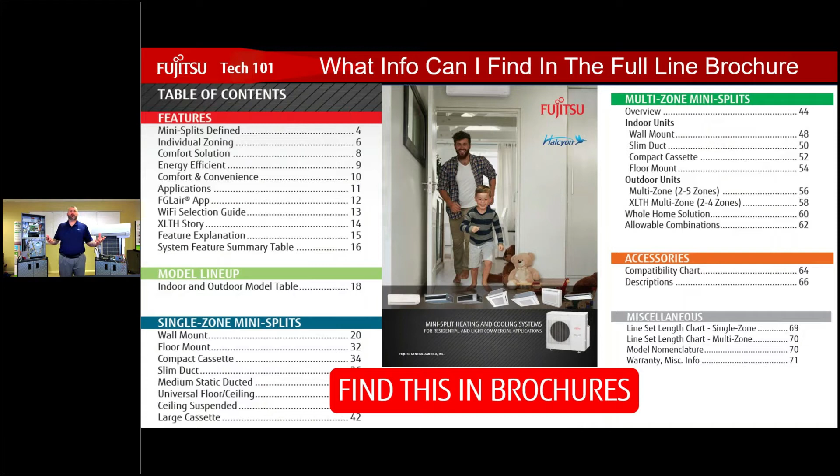Most of the stuff we're going to be talking about in this first portion is going to be found in your Fujitsu full line brochure. We don't have them in stock currently, we're still waiting for some, but you can go to the Fujitsu website. If you're looking to download it, you can download it, print it up, and staple it together. That's basically what we've been doing for the last couple of months.

This is what you're going to find when you open up your front cover. You're going to see our table of contents, features, model lineup, single zones, multi zones, accessories, and then miscellaneous information.

Understanding the Fujitsu brochure, one of the things that we have is our outdoor ambient heating design temperatures. We have basically tops in the industry as far as our heat performance is concerned. We have our good, better, best here, entry-level wall mount, that RL2 at the bottom in 9 and 12,000 BTUs.

That is a 115-volt system. We can provide heating down to 15 degrees and cooling down to 15 degrees. However, on the heating side, that's not going to shut off at 15 degrees, we're still going to be able to provide heat. The only thing is, as we get below 15 degrees, we start to lose some of the capacity of the unit.

Then moving up, we have our high SEER units, the RLF1 series, that's the 9 and the 12. Those are going to be both multi-zone and single zone capable, with heating down to 5 degrees. Once again, same thing, after 5 degrees, it gets rated down on the capacity.

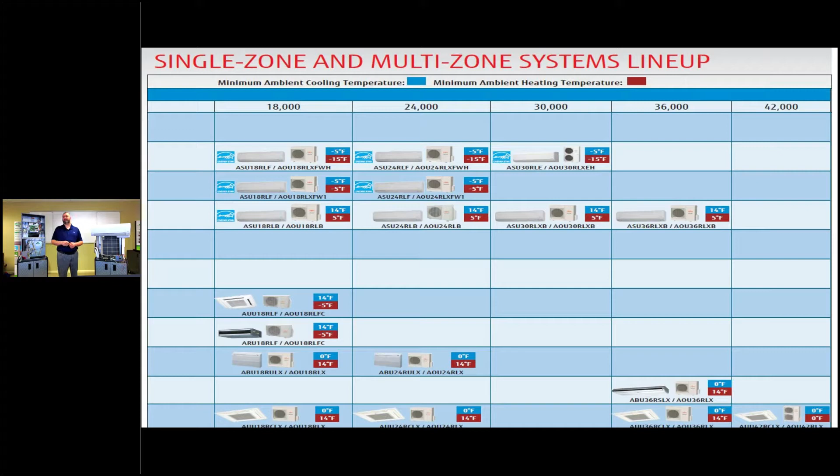New to the Fujitsu lineup, we have our multi-positional air handlers. These are something that I'm very excited about. It kind of brings the unitary to the Fujitsu world. We have these available in 2, 2.5, 3-ton, and 4-ton setups.

As of right now, they are 1-to-1, only single zone applications. We're hoping that we start to move towards, maybe adding the 2 and the 2.5 towards a multi-zone system at some point in time. But right now, they are going to be single zone systems.

As you can see here, we have our unitary products on the left-hand side. A direct comparison you can see with the multi-positional air handler, a much smaller footprint on the outside, with the unit still kind of being the same cabinet as we got used to on the Fujitsu unitary product. If you've seen the Rheem units, you've become familiar with that setup - that is the exact same cabinet as the Rheem units.

As I said before, capacities are 24, 30, 36, and 48,000 BTU. Multi-positional, we can have this unit blowing upwards, upflow. We can also do horizontal left, horizontal right, and downflow setup. The only thing is, if we're doing horizontal right or downflow, we'll have to flip the coil to make sure we can allow proper draining.

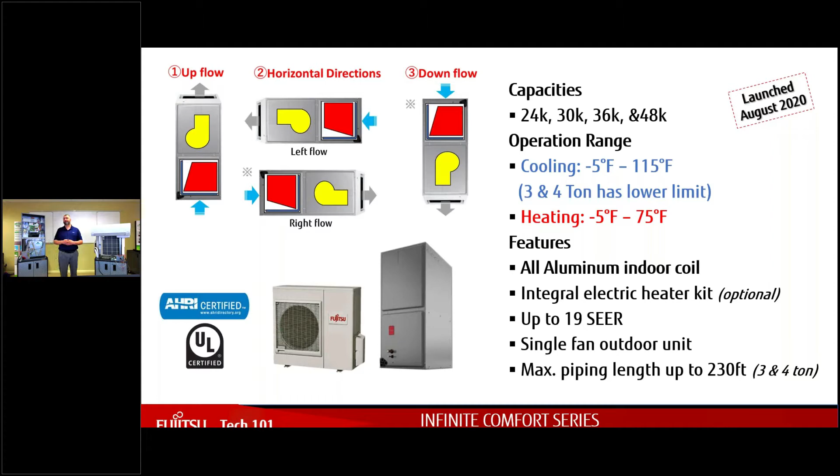Single fan outdoor unit, just like most of our Halcyon lineup. We also have the ability to do up to 230 feet of piping on the 3- and 4-ton system, so we can go a pretty long distance as far as piping is concerned. Now we're able to introduce mini split technology into a multi-positional air handler and start to get into that unitary equipment lineup.

A good question came in from Thomas. It has to do with efficiencies at the extreme end of the unit's performance. So if we're at -5 or -15, am I getting 100% out of this? Is it going to be diminished? I know there's more detail coming up.

On those extra low temperature heating units, we will be able to give you that nameplate temperature down to -15 degrees, and we start to lose capacity after that. Some of the other equipment is going to vary. We don't necessarily see 100% nameplate capacity when we get down to those design temperatures on some units, but it's going to be close, in that area. We'll dive further into that as we go forward.

One of the gentlemen wanted to know if we're going to have smaller wall-mounted units, smaller, like in the 3,000 range. There's nothing in the plans right now. We do have 4,000 BTU units on the VRF side, but on the Halcyon equipment side, nothing as of yet. We do get down to 7,000 BTUs, but that's only going to be in a multi-zone application.

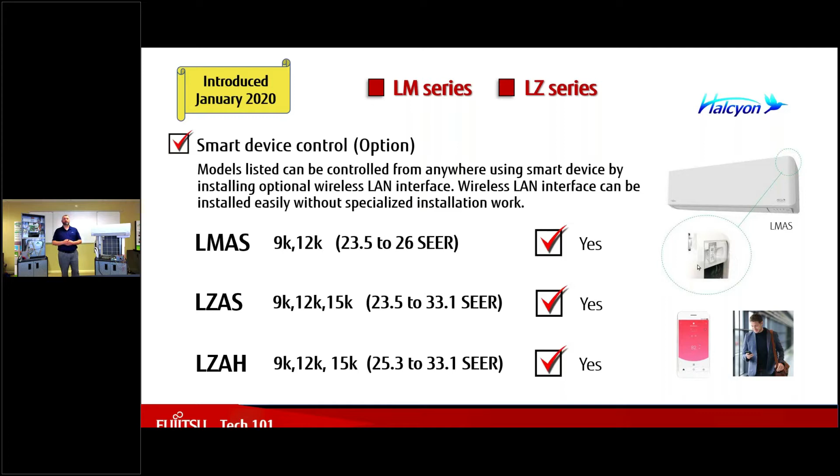We also have smart device control available with these three systems: the LM, the LZ, and the LZAH. All we have to do is install a little LAN interface box, which installs right in the upper right-hand side near the control board, and that gives us the ability to control our system from our smart device - iPhone, iPad, or whatever you may be using as a control.

It also has the ESP function. Basically, if you are in the room, it senses motion and operates normally. If you leave the room and there's no motion, it's going to power itself down, so it's not using so much energy to heat and cool an unoccupied environment. Once you walk back in again, it activates and goes back to its most recent setting.

Some remotes are available for a single zone system. All of our wall mount systems come with a handheld remote control. These are optional accessories that have to be purchased outside of that.

We can install wired remote controls, simple remote controls, communication kits, external connect kits, wireless devices, and such. So there's a bunch of different options we can go with as far as connectivity to our system.

One reason you might want to hook up a wired remote controller is that most of these wired remote controllers have a thermistor built into them. So if we have a unit installed high up on a ceiling, and our congregating area is 12 to 14 feet below, we can set the unit to read temperature from that remote controller instead of the thermistor 14 to 16 feet up in the air, making it a more comfortable living environment.

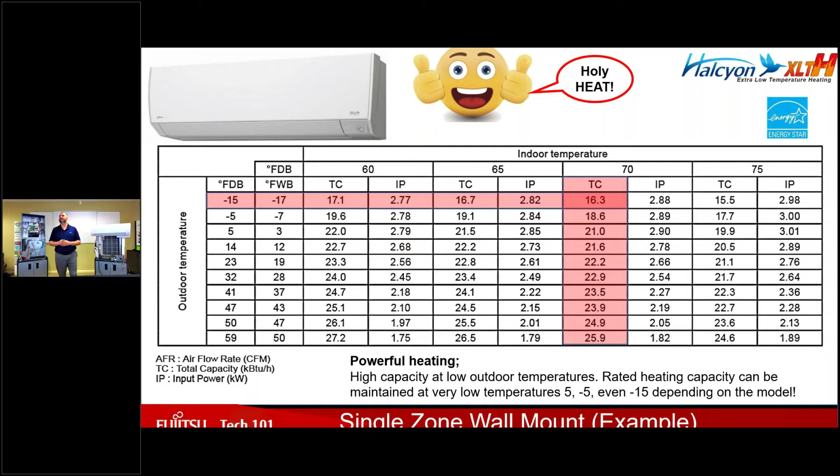On these systems, you get a more robust type of remote. You get a weekly timer, economy, even sleep mode. It comes with powerful operation, and you could do minimum heat. So say if you're going on vacation and you just want to set the unit so you don't freeze the pipes in your house, you have the ability to do so just by clicking minimum heat. Save yourself some energy, and save yourself the worry of dealing with busted water pipes and a flooded basement when you get home.

Moving on, the 9 and 12 RLFs. This is the middle of the line unit, also able to be hooked up to multi-zone systems. So if you see a multi-zone system, an RLF is going to be the indoor unit in the indoor unit model number. Mid-range on the efficiencies, 23 and 22 respectively.

And an HSPF of 11, which does put that in the Energy Star category. So for a single zone system, if you wanted to install one of these, you will have an Energy Star unit and possibly rebates to come along with it. Cooling down to 14 degrees and heating down to 5 degrees. Once again, none of our equipment will shut off at those lower temperatures, we just start to lose some of that capacity.

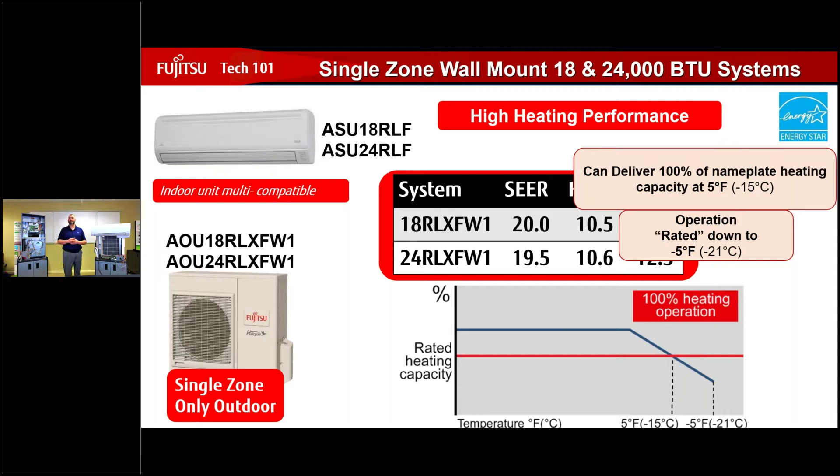So why would we want to provide cooling at -5 degrees? Exactly for that reason, this is why it's perfect for a server room. Server rooms always end up producing a lot more heat, therefore they need a lot more capacity all year round. In order to provide that, we need to be able to get down with our cooling operating range - so -5 degrees is what we're able to cool down to.

So another thing with these pieces of equipment, let's say you have a larger room that's going to be more than a 30,000 BTU capacity to cool that server room environment. We have the ability to daisy chain the wiring between the two units, and that will allow us to have lead lag control.

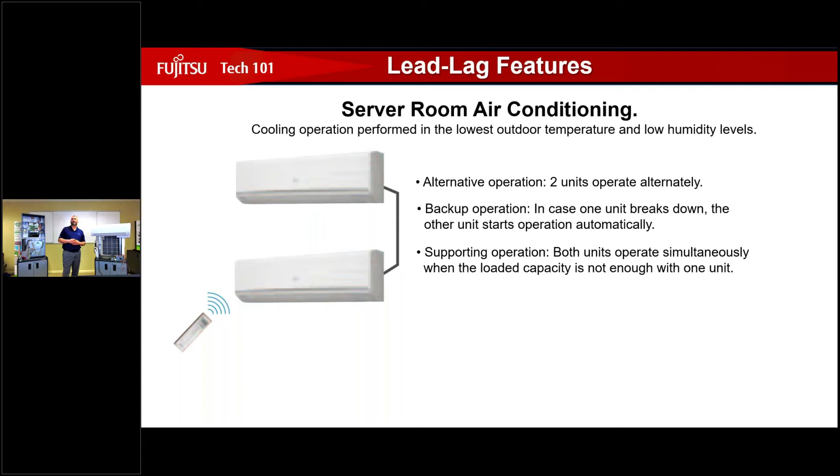Also, this is an optional accessory that comes with a wall mount remote. But if you wanted to, you can get one of these, the RNR UZ2. That's a control meant for this piece of equipment, and it can display the room temperature right on the control, so you have that ability. Just remember that wired remote will not work with a lead lag twin installation, so if you're looking to do a lead lag controlled system, we want to make sure we go with the handheld remote.

Then we get into our outdoor units here. You can see on the bottom we have our 18, 24, and 30, 36 configurations. The 30 and the 36 come standard with a blue fin heat exchanger, which is just an anti-corrosive coating put on the coil, a cobalt blue protection. That's really useful in shore type applications where we have a harsh environment. We could also have the outdoor boards coated so they're less susceptible to the harsh environments of shore living.

Heating capacities from 5 to 75 degrees, cooling from 14 to 115 degrees, and you can see the efficiencies as well, around 19 down to 16.5 on the SEER rating, and starting at 8.5 and going up to 12.5 on the EER. The 18 and the 24 are Energy Star units. The 30 and the 36 are not.

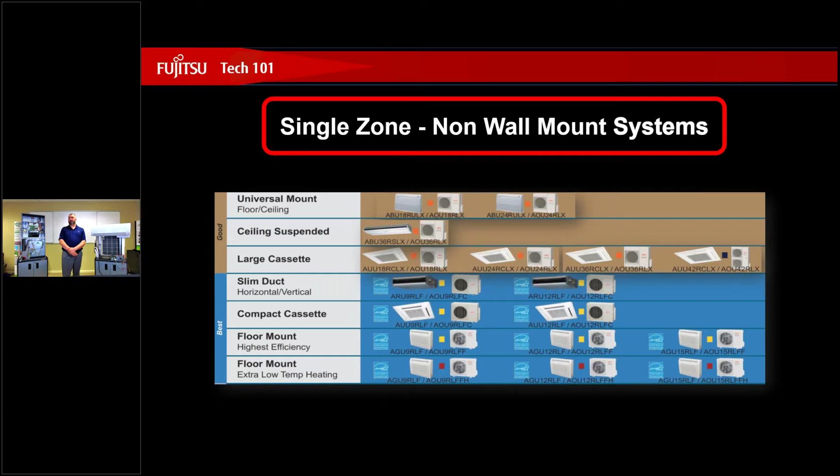Hey Rob, I got a question on this universal. Now that you clicked on it, what's a good application for this? The best kind of application, or most frequently used application for this piece of equipment, is going to be in a church or a school or something like that, usually found in the main areas, vestibules, foyers, stuff like that. Sometimes they'll take the place of PTACs, but most of the time you're going to see these in schools or churches. Thank you.

Let me go back. So you could see there, we have our ceiling mounted, floor mounted universal piece of equipment, 0 degrees low ambient out of the box. So we could also use these for server room applications if need be.

160 foot on the extended piping. So once again, for single zone system, very long line sets, and as I mentioned, great for schools and churches.

We get to the 36, that is only going to be a ceiling mount. We don't have the ability to mount that on the floor. 160 foot pipe and up to 98 feet of rise, so we can go upwards as much as 5 stories, or even downwards if we have to, if we wanted to install the outdoor unit on the roof and then put this indoor unit on the first floor. Once again, can be used in a computer room, and we also have a fresh air intake option, which I'll talk about a little bit more once we get into the accessories portion.

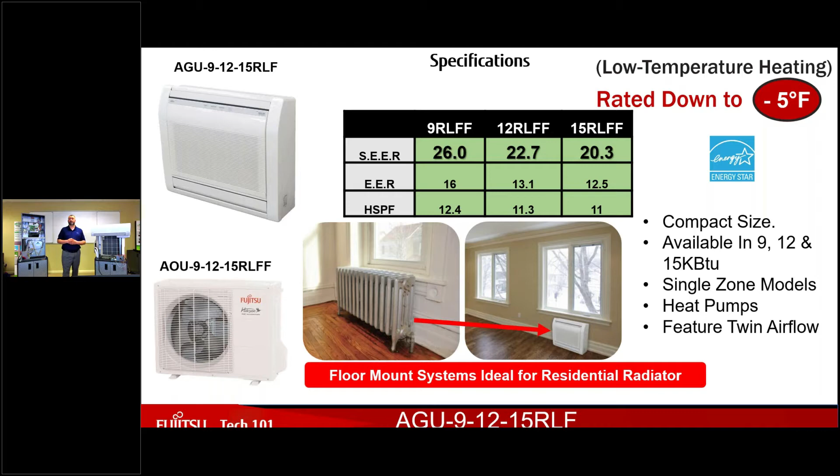But here's our answer for that. So available in 9, 12, and 15,000 BTUs. All of them are heat pumps, and they are available in extra low temperature heating. You can see that right there, down to negative 5 degrees.

Getting into the slim duct units. We have the ability with these guys to do a horizontal and an upflow scenario, available in 7, 9, and 12,000 BTU. We also have an 18, 24,000 BTU in a larger cabinet size. So we have 2 cabinet sizes that'll cover those 5 ranges.

These all come with a wired remote. We do have the ability to install a handheld remote, but we'll talk about that more in the accessories. All right, so these are our slim ducted units.

They do have adjustable static pressure. It's not automatic, so the static pressure is something that you're going to have to adjust on the job. And we always want to make sure that you know this is a very low static unit, so we cannot do a great deal of ducting with this piece of equipment. We want to keep the ducting very minimal, 5, 10 feet at the most, depending on what the sizes are. So something we want to be careful of when we're installing these. We don't want to do multiple rooms with these pieces of equipment. They're just not meant for that.

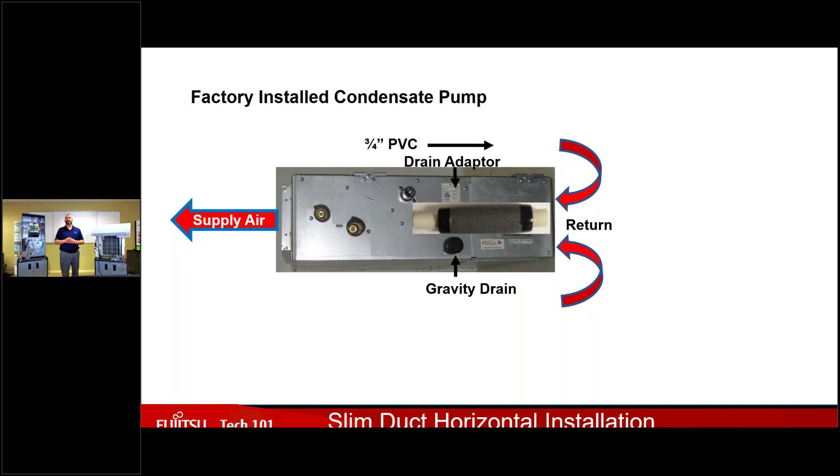All right, there's your lift on your pump: 33 inches from the bottom, or 28 inches from the port itself.

Now also, when we are doing this unit in a wall mount vertical application, we always want to make sure that we remove the JM1 resistor.

So if you look on the main control board, which is located right over here, on the bottom right-hand side of that control board, you'll see this little circle with the dots around it, and it'll have 3 resistors on it. They're labeled, but they're a little bit tough to see.

We want to cut the bottom one out, and basically what that does is it just cuts the power to the condensate pump. If we don't do that, we're going to get a condensate pump error code, because in that position, that condensate pump will actually send a closed signal to the board, telling the unit that the pump is working properly, but that there's too much water in the pan, and it's basically cutting it off. So we'll get an error code if we don't cut that JM1 plug out.

Excuse me, Rob. Yes, so another good question. Again, it looks like some people have never seen this unit before, or aren't familiar with what's a good application for it.

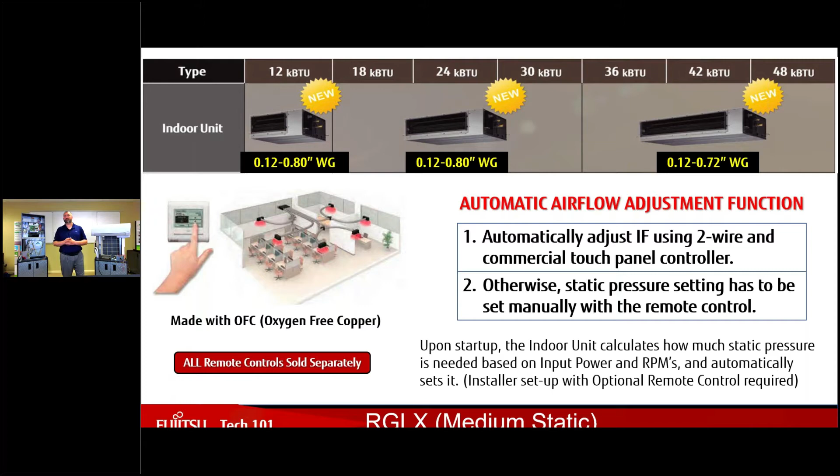If you use a 2-wire remote system on this, we get our automatic static pressure adjustment, so the unit will actually detect what the static pressure of the system is and adjust it accordingly. Otherwise, you would have to set that static pressure manually. So if you installed that 3-wire control, you'd have to do that manually.

Let's get into our compact cassettes. These fit in a 2x2 ceiling grid application, which is where we're going to see these used most, maybe in office settings, much like we have here, with a drop ceiling. Fits right in that 2x2 ceiling grid.

Maybe meeting rooms, stuff like that - that's where you're going to see these most of the time. They have a very low profile, a very powerful 2-stage fan, and they're available in 9, 12, and 18,000 BTU.

There is a factory installed condensate pump on these, and that is the same lift as the slim ducted system.

These units are shipped with a wired remote, but we do have the optional accessory to use a wireless remote control instead. And once again, that fresh air accessory kit - so if we want to introduce fresh air into the room as well, we have the ability to do so.

All right, getting into the larger cassettes. These are not going to fit into your standard tiles, so you might have to do some readjusting if you wanted to put these units in a drop ceiling type scenario.

One thing I do want to say - if you are installing them in a drop ceiling type scenario, we want to make sure that we always hang these units with threaded rod. We don't want to just suspend them from the ceiling, because they're going to be too heavy, and eventually, if not right away, they're going to fall and crash to the ground, and that's an expensive mistake.

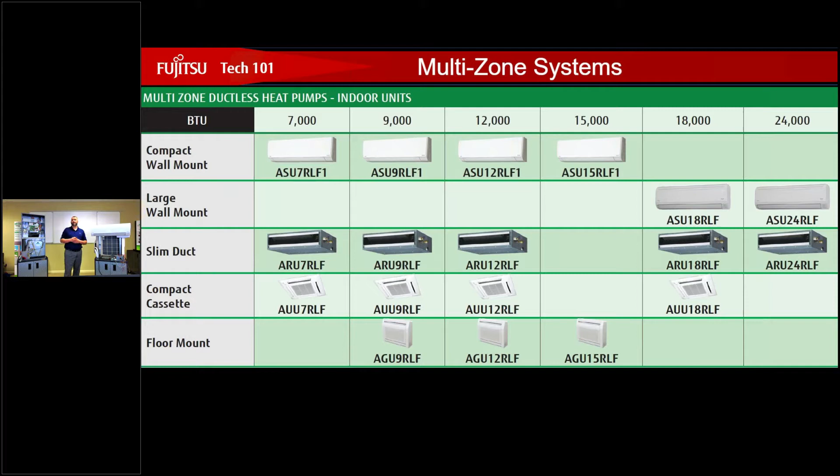The outdoor units start at 18,000 BTU. We can connect - or rather, we have to connect - 2 indoor units. With our multi-zone systems, it always has to be at least 2 indoor units.

Going up to the 24, we can do 2 to 3 indoor units. The 36, we can do 2 to 4. The 45, we can do 2 to 5.

The 48,000 has really been superseded at this point by the J series equipment, so I don't even think there are any of those left in existence, at least for sale. We might run into those as far as the service side of things, but as of right now, I don't believe there are any more available for sale. Just mentioning it because it's there.

These systems are able to provide cooling down to 14 degrees, heating all the way down to 5 degrees - that's our rated capacity. If we opt for the XLTH, we could do down to -15 degrees for these units. Not for the 45 though - the 45 does not have an XLTH.

Okay, so our connected capacities are always going to be the most important thing when sizing our equipment. We want to make sure that we stay between 80 to 130% connected capacity. The Fujitsu full line brochure goes over that, you can see your connected capacities. I believe it's on pages 63 and 64 of the full line brochure.

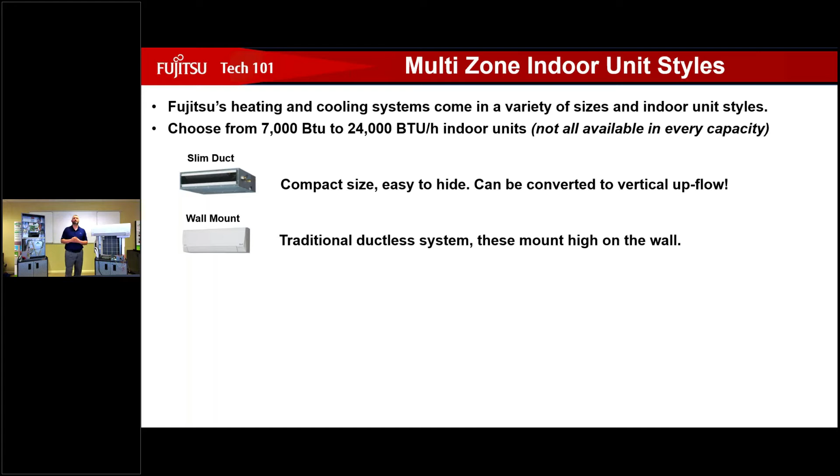So slim duct, compact, easy to hide, wall mounts, traditional systems - we've seen those all over the place. We have our cassettes, which we spoke about, they fit in a drop ceiling. Our floor mounted units for those who don't want to see it on the wall.

So getting to our outdoor units and the units that we can connect to them - as far as the indoors are concerned, everything in the Fujitsu manual is going to be color coded. So as you can see here, the 18,000 BTU system is going to have that yellow border around it. So anything in yellow, we are going to be able to hook up to this piece of equipment. We want to always stay within Fujitsu's guidelines.

24, same thing, now in blue. Moving to the quad zone, anything in red, and then moving to the 45, anything you can see in green.

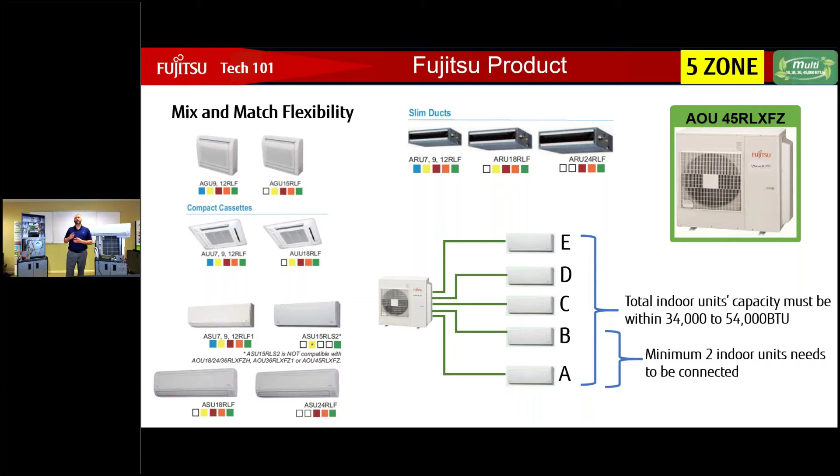So the gentleman asked, can I mix and match, or do all the units have to be the same? Yeah, so all of our systems have mix and match flexibility - that was actually the next thing I was going to get to. Which means if you want to put a wall mount unit in one room and a ceiling cassette in another room, and then have a ducted unit on the other side of the house, and a floor mount unit too - as long as we fall into the correct BTU range, we can mix and match our indoor units with impunity.

So where are we going to find that multi-zone information? Fujitsu full line brochure is going to be our best tool as far as compatibilities, combinations, BTU, SEER rating, HSPF, what size breaker we're going to need, what size wire we have to use, pre-charge lengths.

Total lengths for our copper lines, minimum, maximum, you name it, it's all going to be found in our Fujitsu full line brochure. So as you can see here, our 18, our 24, our 36, and our 45, we have specific ground rules that we have to go by strictly. These are all tested by Fujitsu to work.

On the 18,000 BTU unit, we can connect from 14,000 to 21,000 BTUs. So we could do 2 7s on this unit. We could do a 7 and a 12, even though it's 19,000. We could even do a 12 and a 9, because even though that reaches 21,000 BTUs, that modulation is really what Fujitsu kind of banks on.

We're not going to be operating at 100% capacity all the time. We may not ever really operate at 100% capacity except for on initial startup on a really hot day. So for the most part, they're very comfortable saying we can go a little bit over what that BTU rating on the outdoor unit is.

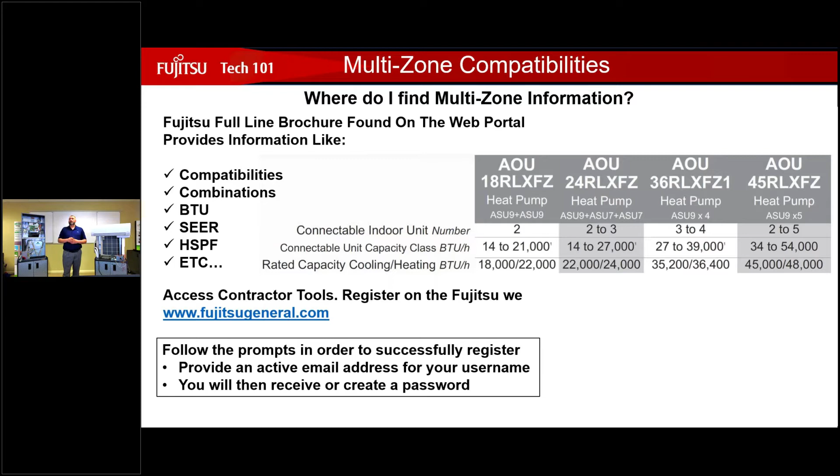Throughout Fujitsu's full line brochure, you're going to notice quite frequently different kinds of symbols, asterisks, numbers, other types of symbols. Usually when you see something like that, it means there's some sort of accessory kit you have to also purchase to make sure that you are compatible with this equipment.

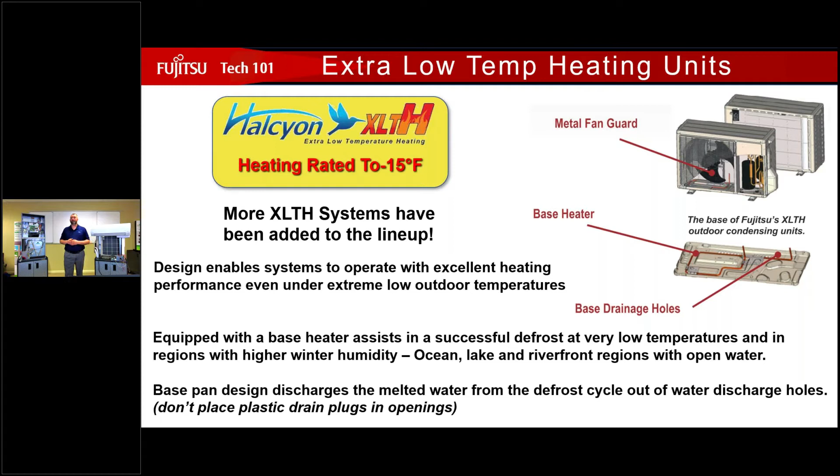So we have our single zone systems, 18, 24, and 30, and then our multi-zone systems as well, 2 to 4 indoor units, all available for XLTH, -15 heating capacity. Those are all Energy Star units as well. Here you can see the 18 and the 24, Energy Star, above 18 SEER, above 10 HSPF.

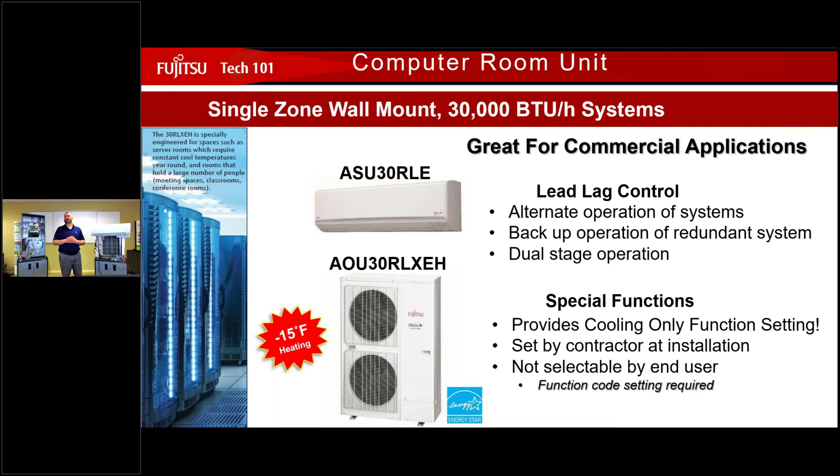Once again, our ASU 30 is great for commercial lead lag applications. 2 to 4 connected units on our 18, 24, and 36,000 BTU, down to -15 heating. Remember, the 45,000 BTU does not have that XLTH option.

Then we have our accessory remote controls. We have our standard remote control on the left, and our wired remote control with the multiple units feature on the right. Group control we can do on that one, up to 8 indoor units. Both are 2-wire setups, both very simple on the remotes.

The one on the right is going to feature a backlit display, so it's a little bit nicer to look at. Both provide basically the same kind of features.

Getting to our simple remote. You might see these simple remotes in hotel applications, something like that, where the building manager or building owner does not want the end user to be able to do too much with the equipment. It's basically going to give you start, stop, control the temperature, control the mode, maybe control the fan, and that's really about it.

Remote sensors, we can have those if we're looking to read multiple room temperatures, say in a ducted system or whatever, we can mount these on the wall. This is mostly for the slim ducted units, and it just replaces the room temperature sensor in the return. So basically we're no longer sensing from the unit, we're sensing from these remote sensors.

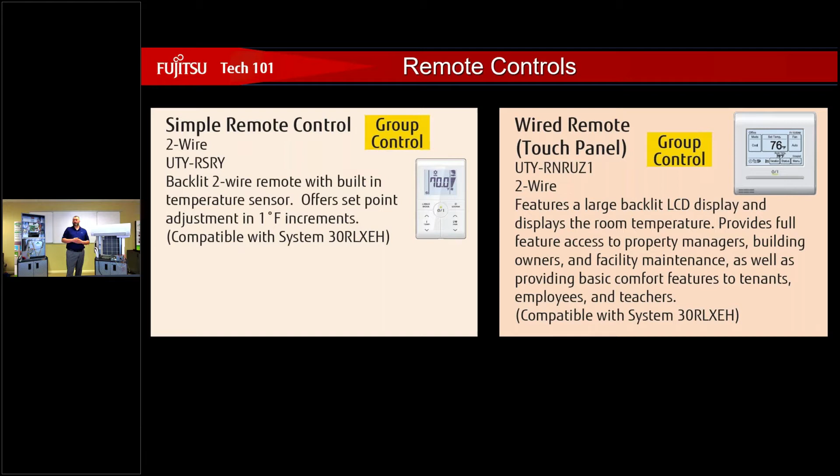Wireless remote control, standard, we have a couple of different designs for those. That's for spaces where we don't want to use a wired remote or more of a wall mount unit, something like that. Central controller, we can control up to 8 indoor units, set temperatures, timers, and all that right from the unit itself.

And then we have our receiver unit, which I mentioned earlier when talking about the slim duct and medium static ducted units. We can hook this little receiver up, about the size of a standard wall switch receptacle cover, mounted right on the wall. There's a wire that comes with it that plugs right into the board on certain pieces of equipment, mostly the slim ducted units and the medium static ducted units, and that allows us to operate those pieces of equipment with the handheld remote instead.

Always keep in mind, there's going to be a remote control that ships with most of our units. Make sure that fits what application we're going to be installing in. If it's something we might need to change, that's a part that's going to have to be ordered as an accessory.

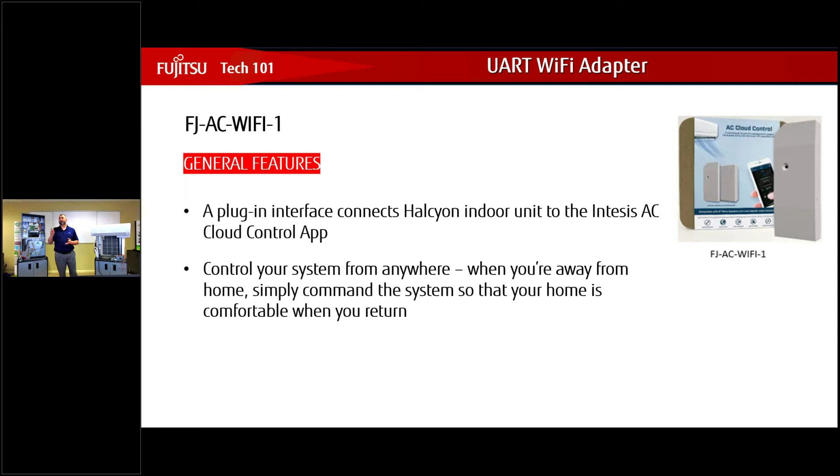Getting into the Wi-Fi, the FJAC Wi-Fi 1, this is an Intesis cloud control device. It basically plugs right into our board, uses a 12-volt power supply, 12 volts DC, power supplied through the interface cable that comes with it. That's going to allow you the ability to plug into the board and now control any number of our indoor units using the Intesis cloud control app. So if you're used to installing something like a Nest thermostat, this is basically going to be along the same lines. We now have the ability to control through an app.

Getting over to the building management side, we have our Modbus building management system. This is quick and easy installation, just like the other one, another very small part, roughly about 3 inches at most. Gives total control to the building management system, so you can control it through the Modbus building management system. You can adjust anything from dual heat, cooling set points, runtime counter, error indication, all that. Those displays will be sent to the building management system.

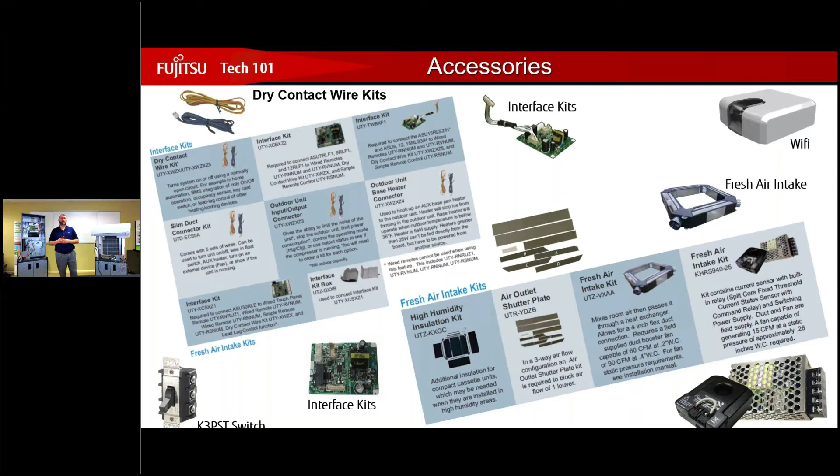If we're looking at the large cassette systems, we have the ability to shut down one or more of the air outlets on the unit itself. So if we're mounted close to a wall and don't need to throw heat or cooling at that wall, we could just put that shutter plate there. Also with those units, we have the ability to run one small outlet off of them as well.

All right, now brand new, something we've been asking for a long time, finally announced in November 2020: we have wind baffle kits. In a lot of trainings, guys would ask us if we had these, and we always had to say unfortunately no, you have to either make something or go with a third party. But finally Fujitsu has released them. There are a couple of different models - just go by which outdoor unit you have, and you can select the wind baffle you're looking to get.

Also available for J series as well. Basically, the use for these is what's called windmilling. If you have roughly 25 mile-per-hour winds pushing on the fan, blowing it in a backwards direction, you could end up causing a communication error on your system, which would have to be reset - a nuisance service call to have to go out and flip the switch to restart the equipment and reset the code. The wind baffles will prevent that from happening.

Thank you, Eric. All right, installation is very simple. You're basically using the screws that already exist on the unit - just popping them off and putting that wind baffle in and putting them back in. So very simple, easy application to install.

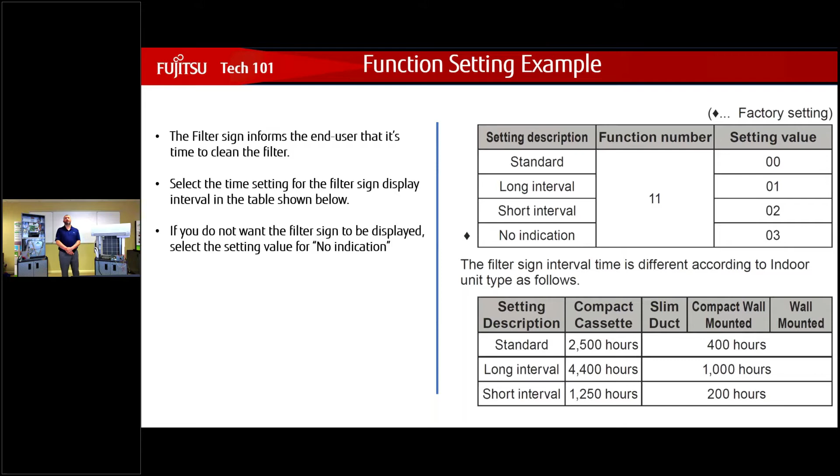And then you can see the breakdown: standard is 400 hours, long interval is 1,000, short interval is 200. I always went with once every 30 days, except if you're in a really dirty environment like a metal shop or a wood shop - those you might want to clean out weekly. It's not something I used too much when I was out in the field, but it's there as a reminder to the end user.

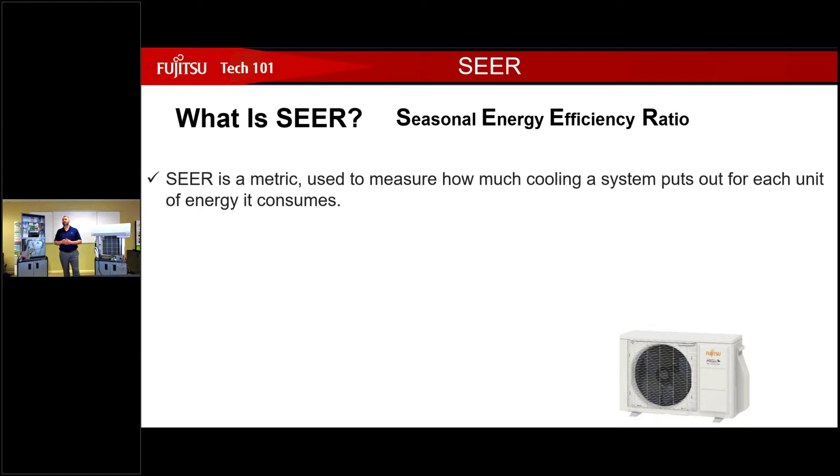Efficiency comparison. What is SEER? That's the seasonal energy efficiency ratio. It's basically a metric to figure out how much a cooling system puts out for each unit of energy that it consumes. The higher the SEER rating, obviously, the more efficient that unit's going to operate.

The LZS and LZAH are among the most efficient products in North America, especially on the heating side. There may be some competitors that beat us on the SEER, but they don't come close to us as far as the HSPF is concerned. So, 33-point SEER on those units.

HSPF, as I mentioned earlier, is heating seasonal performance factor, and that's basically showing the heating efficiency of heat pump systems. On our LZ series, we have an HSPF of 14.2. That's tops in the industry. Any heat pump manufactured after January 2015 is required to have at least an HSPF of 8.2, so anything produced after 2015 will have that. Remember, the higher the HSPF, the higher the efficiency of the unit.

So why Fujitsu mini splits? One of the main reasons, besides the convenience and zoning, is strategic electrification, something we're focusing on in America and worldwide. As you can see from the charts, about 25% of homes are electric in America right now, broken down by territory. In the Northeast, we are mostly in the natural gas range, but that's something we could start to get away from as well.

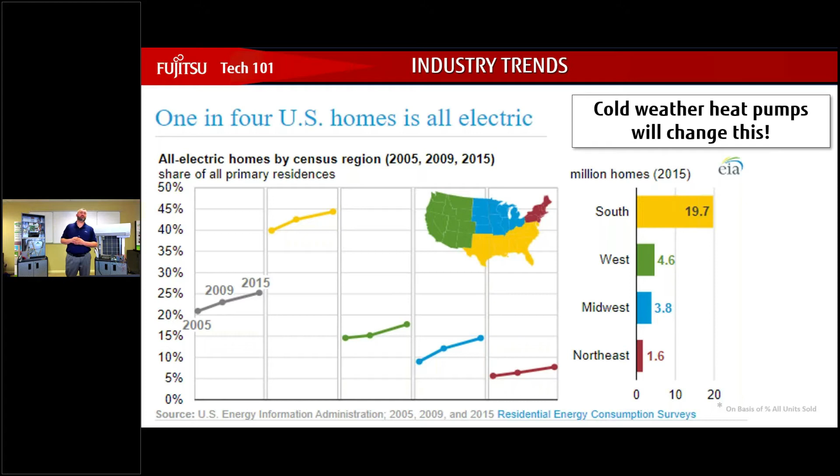Down south, you can see from this chart, right around 20 million homes are using electric as their source of heat with cold weather heat pump, and our heat pump technology is really going to start to impact those environments.

If you take a look at comparisons, in the USA between 7 and 8% of equipment purchased is mini split heat pump or VRF equipment. You look at the rest of the world, Japan is at 90%, China at 85%, and Europe at 85% mini split. So huge difference. We are always late to the parade on everything, it's just how we do things. We're very slow to adapt to changes worldwide, but this is something that's really going to start to take effect with this strategic electrification.

As far as 2018 was concerned, we saw a 16% rise in mini split sales and a 22% rise in VRF equipment. So you can see how we're changing very rapidly. Compare that to unitary equipment, which saw only a 7% rise. Growing exponentially.

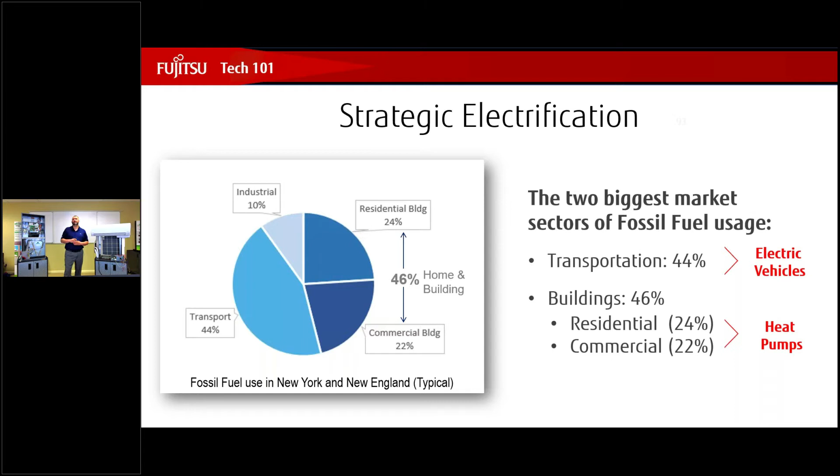Now, this is right here in New York, New England, not all of America. This is just our territory.

Because of this, they're being very aggressive as far as rebates are concerned. You can find a whole bunch of different rebates and tax credits, going to, in our territory, the NEEP website, as well as local and federal programs.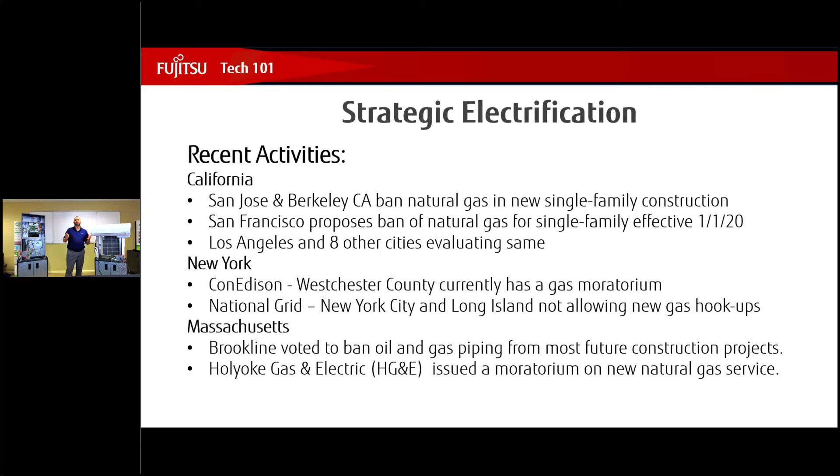Some recent activities in California, New York, and Massachusetts just show that we are moving in that direction. This is really the time to get into heat pump technology.

So why are we doing this? It's basically because there's a concern about our ever changing climate. We're getting warmer, and it's starting to get to the point where it's becoming a major concern, and something has to be done, not tomorrow, but right now. That's why there's such a big push for this at the moment.

So why are heat pumps part of that solution? The entire grid is getting cleaner. We are now producing a lot more solar energy and a lot more wind energy. That, coupled with the equipment we're installing with mini split technology being a lot more efficient, means we need to use less of the energy this is producing.

So Fujitsu products are basically the perfect fit for this scenario. What can we draw from this? Electrification means we need to install more. This is where we're going.

There is no better time to get started on this than right now, because the rocket's taking off. I follow stocks, and people, when they start to talk about a stock about to take off, compare it to a rocket. Same thing with this technology, same thing with these pieces of equipment. It's going to take off, and if you're late to that parade, you're going to be behind. So try to get yourself in as early as possible.

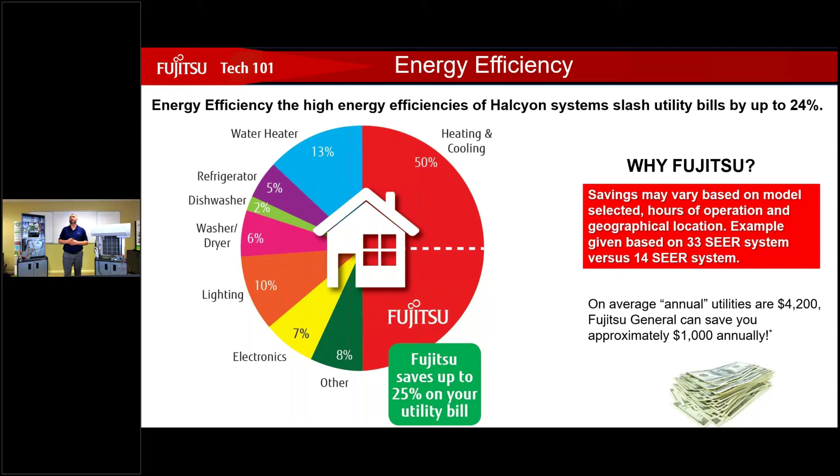So one of the things with our equipment, one of the main selling points - this is the exact pitch that I use on my own wife. As Jim would say, you want to make sure you could sell your wife, sell your grandma.

Me and my wife have discussions quite frequently on stuff around the house, and one of the things we talked about when she first got pregnant was the fact that we like to sleep in our room at 66 degrees in the summertime. We have ridiculous electric bills in the summertime, but that's neither here nor there. So this was my selling point to her.

We could still have our 66 degrees and still have our son, who's now a little more than almost a year and a half old, have his own climate in his own room. And that's what we're selling when we're selling zoning - we're selling individual climates to each home.

So we're at 66, we're comfortable, he's at 70, he's comfortable, her parents are staying in the spare bedroom - they may like it at 74 degrees. Old blood runs a little bit thinner, right Jim? Sorry, I don't mean to pick on you, Jimmy.

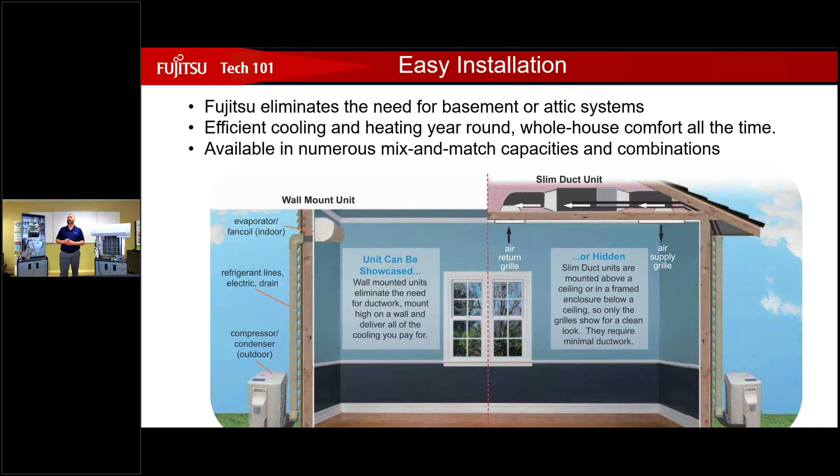At this point in time, we can do just about anything you can imagine, anything that you could ask for, from fast food restaurants to multifamily housing to office buildings to homes to single rooms, garages, car washes, you name it. We can handle all of those environments.

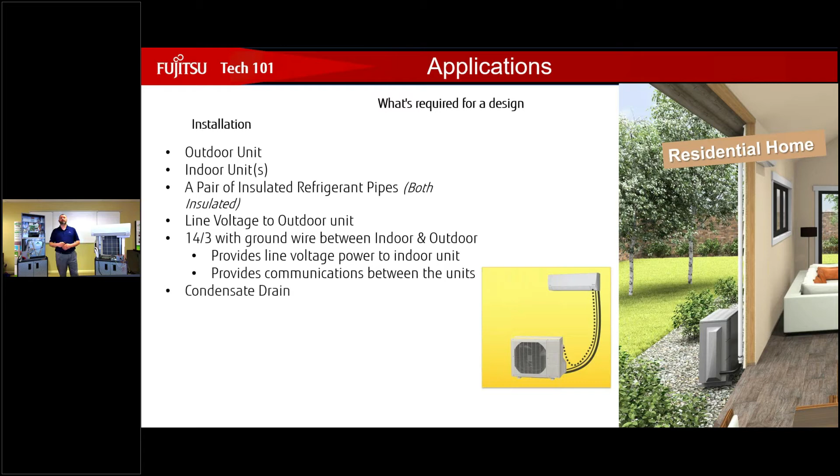Basically requirements for that design: pair of insulated pipes, line voltage to the outdoor unit, 14/3 communication, condensate drain, and that's it.

Our equipment can be controlled by the FGLair app. We can hook up with this little guy over here, the UTY TFSXZ2, and basically be able to control our indoor unit through an app.

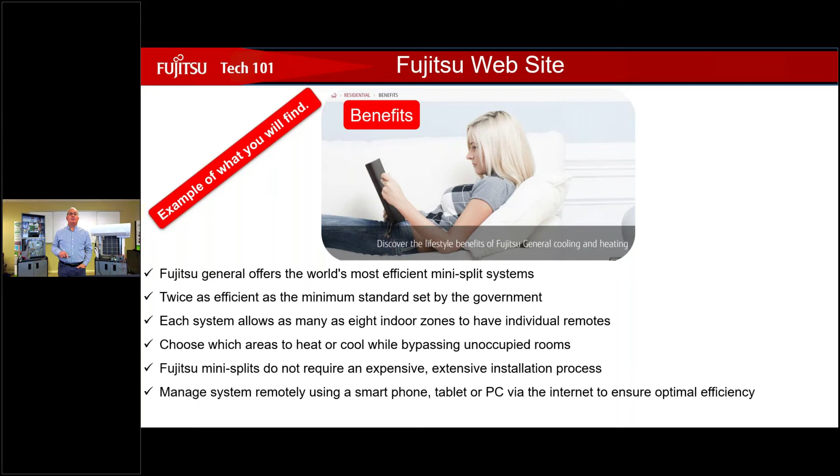If you can't tell, I'm really big on that. I really want you guys to take advantage of this. So if you click on the benefits tab, it goes through all the information you see popping up on the screen. These are the things you can talk about. Rob alluded to most of them on here, the efficiencies, all right?

You have to be able to explain to your customer why we're efficient, how do we operate. That's explained in the catalog, that's explained on the website, but everybody should be able to explain how a Fujitsu system operates, even if you're talking to my 95-year-old mom. So gentlemen, in a brief nutshell, how does a Fujitsu system operate?

It's going to monitor outdoor temperature, it's going to monitor indoor temperature, it's going to monitor the refrigerant temperature, and it's going to ramp up and down based on those different temperature settings.

If you want to really break it down, it's like cruise control in your car. I'm going to monitor outdoor, monitor indoor. If it gets warmer or colder outside, I put more energy into the home to keep that comfort level. If it's cooler outside, I put less energy to keep the home comfortable. That's basically it. So if I have a weather adapting system, and a system that also adapts to the indoor environment,

we put more and more people into the room, the indoor unit's going to sense that. The unit will pick up on that, tell the outdoor unit, I need more power, basically I need more effort, and the outdoor unit will respond. That's how Fujitsu systems work.

So these types of benefits are described here on the Fujitsu system website. Technology, this will break into - back up. Technology will break into what's available, what we have available to you. It'll go over what I just talked about.

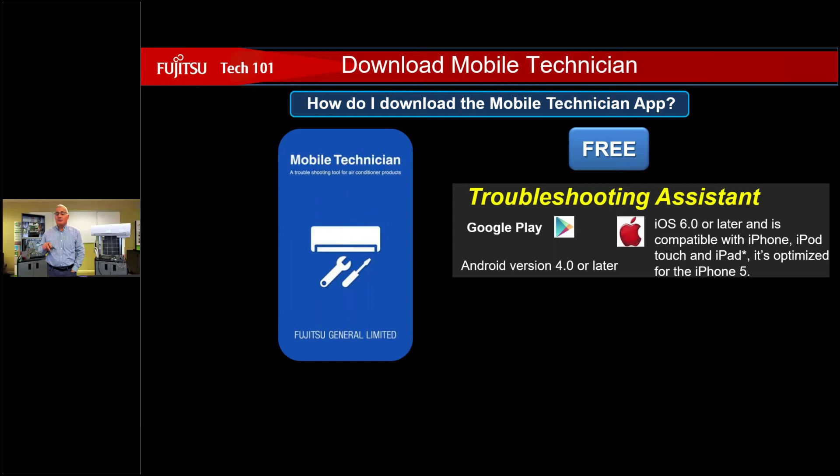So that is the Fujitsu Mobile Technician. You do want to take advantage of that. Again, it's a free download for Apple or Android. Download it today. That's the screen I showed you just a second ago.

We want to go to RAC/PAC. That's how you get to the Halcyon equipment. Obviously, I would go to VRF if I'm dealing with any of that equipment. On the utility, you can see where I can go for thermistors or the PT chart. Again, that's how you can find any of your thermistors. Any thermistors that are on our system will be on this mobile app.

I click on any one of them, and that's when I can go through the testing procedure, putting in the actual ambient air temperature I'm working in, and that would populate my resistor reading and my voltage reading. Sometimes we'll check our voltages going to the thermistor instead of ohming it out. So if the voltage isn't fine coming from the board to that thermistor, that would tell us it's a board problem. We'd have to change the board.

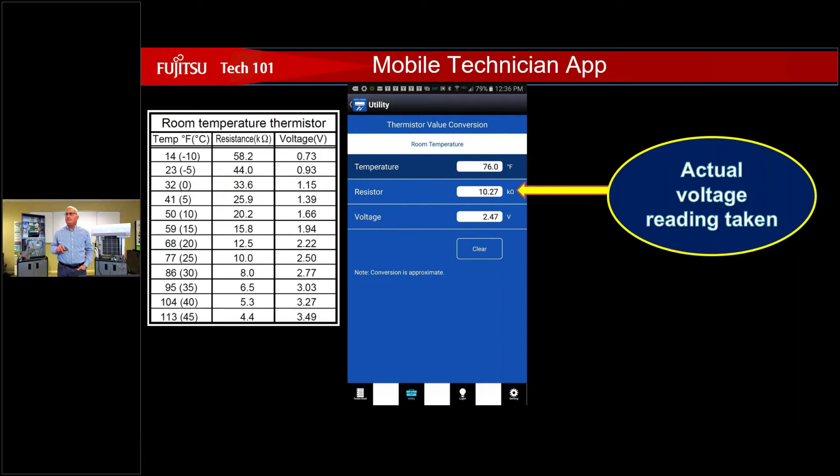All right, we click back here to get back to the home page, and we can go through any and all testing that we're doing. If I do get, let me show you this, because this is my favorite part of this.

So I'm going to go to RAC/PAC, and I'm going to pick an outdoor unit first. There's a search bar that comes up on top, and this is a global app, so you're going to see equipment on here that we don't sell in the States.

In my search bar, I'm going to put in AOU, and hit done. Now what's going to come up are all the different outdoor units available for us in the States. I'm going to pick a 24 RLXF WH, extended heating range. And then for my indoor type, I'm going to pick a wall mount.

I apologize if this looks a little wonky, we're doing our best. So I'm picking a wall mount, and I'm clicking done. Now it's showing me, if I have a wired remote, I could click on that to see the error code, or I can go to my indoor unit LED. Those are the three flashing lights on all of our indoor wall units. So I'm going to click on that, and here's what you're going to see.

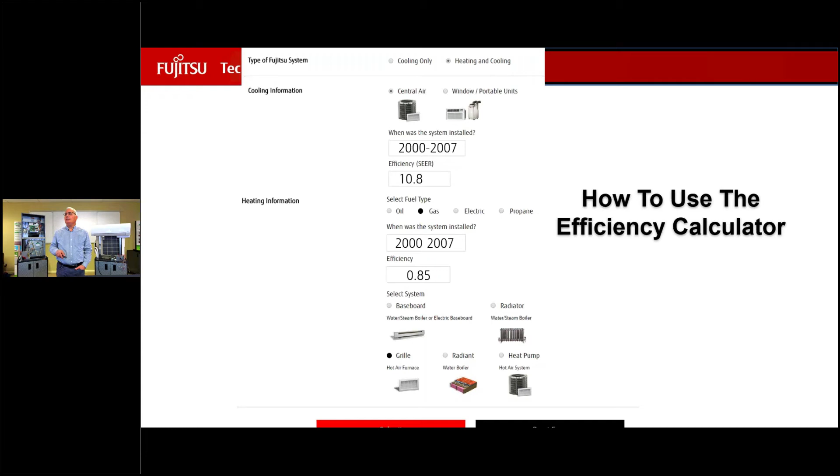Again, install the basic efficiency as you can - what am I replacing, how are we delivering heating and cooling to that system. All right, we click submit.

Then we put in where they live - so here, right in my territory, it's going to be Jersey, Paterson, and the size of the residence, as you can see, and it should populate with their costs. This is very intuitive - it knows the costs in different areas of the country. If anything here has to be changed, if their bills are slightly different, here's where you can make those changes. So it's not based on averages across the country, it's based on what Mr. and Mrs. Smith are using in that home.

So if everything lines up here correctly and the numbers are good, you hit continue. Then it tells them at the top what the results are - their average operating cost, as you can see here, is about $12.50 for cooling and $32.60 for heating.

And then in this area here, it would populate some Fujitsu equipment. It's not showing you in this example, but it would pick some equipment there. It also basically gives the potential savings. And that savings, every time I've used this with contractors, and I just did it

on my own home, it's at least 15 to 20% savings. That's a very powerful sales tool, gentlemen, because you're using Mr. and Mrs. Smith's cost of operation at their home. What does it actually cost? Here are their numbers, plug it in, and here's the potential savings.

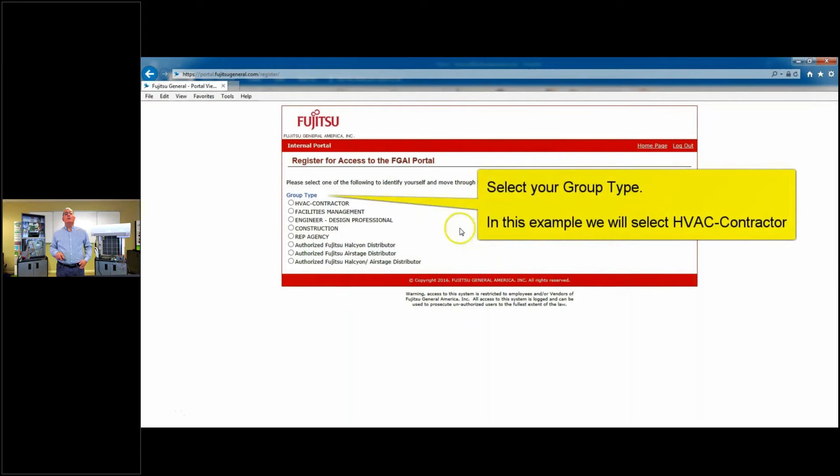You want to select what you are, what's your group type. You're going to click on the link, sign up for the toolbox. Again, you're going to put in your email address, you need to confirm your email address. Anything that's required, you need to fill out.

Put in your zip code, as you can see here, click on the agreement. Now your company may pop up, but if not, you can create a new listing - create your company, hit submit. Put in the information - you're going to need your company name, obviously, and your company phone number.

A little bit of a slow typer here. Rob, are you typing? Is it a 2-finger type? Is that what you're doing? Nope, not me. Work with me, Rob. This is kind of like pretty dull stuff they're looking at right now, just trying to make it entertaining. All right, you got to dance for it. No, no dancing - you don't want to see this old man dance, right?

Put in your address, put in your zip code, very important, and where you are, okay. Put in the type of business - you've already selected it, so that should be already clicked, but if not, click on it.

So if you do residential and commercial, you can obviously do both. Click on that.

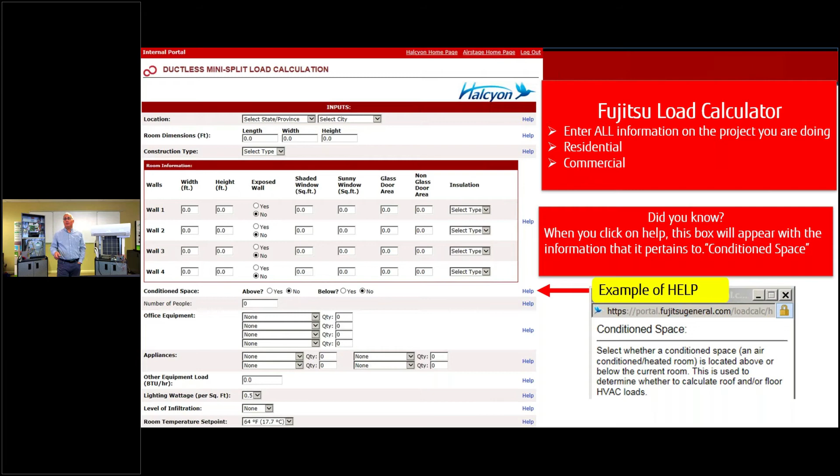You can leave your construction type as residential, then go in and change the different walls and what's on them. Remember, if we're doing a heat gain, I need to identify if a wall is north, south, east, or west—same with the glass. If I'm doing a heat loss, it really doesn't matter. I just want to put in my outside walls, because at night is when it's coldest and we don't have to worry about the sun. So you do that on a room by room basis to get those loads.

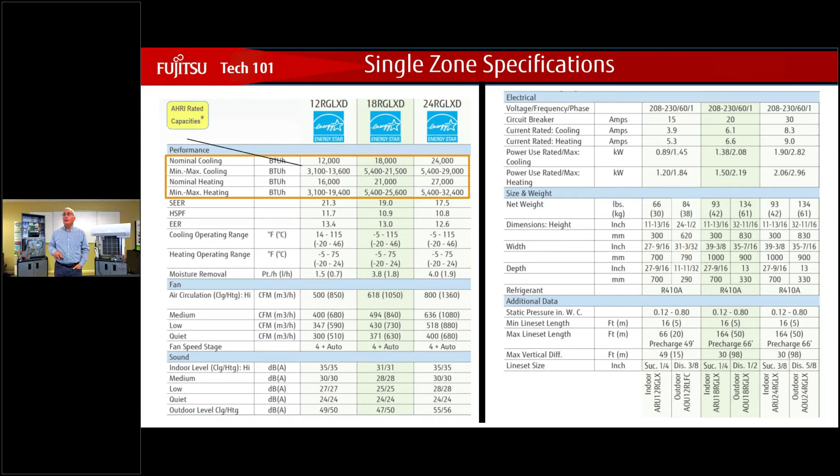Again, those are ratings up there, just where the equipment plays. That's not to use for sizing, okay? This is the design operation range, as you can see, just showing you where it can play. So if this is a -5 unit, you know you can play down there. If you needed something at -15, then you have to go to an H series unit, okay?

This is gold information here, because this is telling you what the line set length is, the minimum line set length that you need when you install our equipment. Whether it's single zone or multi-zone system, there's always a minimum amount of line set that must be installed. It's called out right on the catalog page, your line set size, and we're telling you what it was pre-charged to. So if you fall within the pre-charge length of line set, you never have to touch the charge. And if it's telling you need a minimum of 16 feet, that is the absolute minimum. You'll never hear from us that, oh, I'm only at 10 feet, take out X amount of charge. Never, ever. Not in the world of Fujitsu. That minimum must be installed. This way everybody knows your line set size.

The only thing we're not telling you right here on this page is the ounces per foot you need to weigh into the system if you're going past the pre-charge length. And we'll show you the maximum length so you never overshoot that. All right, these are hard numbers, and you can see they're kind of odd numbers because we're converting metric to feet. So if it says 66 feet max, that doesn't mean you can go to 70. That's a hard number. If it's 16 feet minimum, that doesn't mean 10 feet will be okay. No, it's 16 feet.

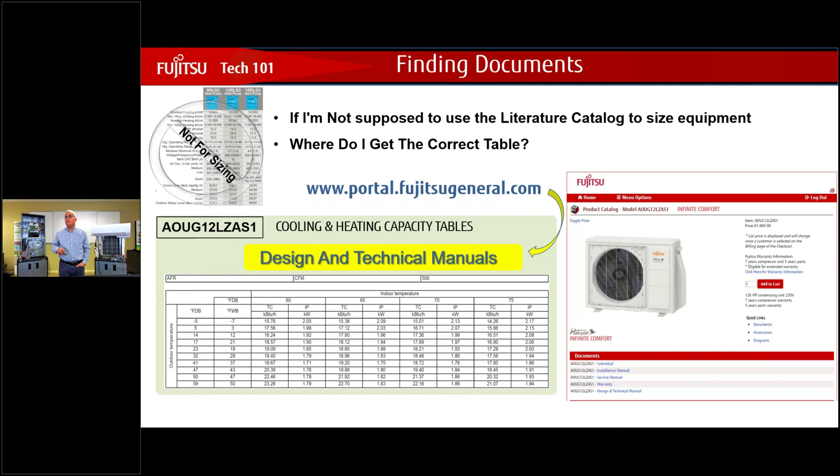So if I go to order entry product catalog, that's how I can find my equipment. There's your McDonald's page, as I like to call it - there's the pictures. Pick your equipment, or go to the search bar for system, or type in a part number, maybe you're looking for a different remote. You can find your unit, and there I can find design tech manual, service manual, install manual, even a submittal sheet if I need to put that as part of my sales package. Any questions on all of that, gentlemen?

Rob's shaking his head. He's shaking his head in multiple directions, so that scares me.

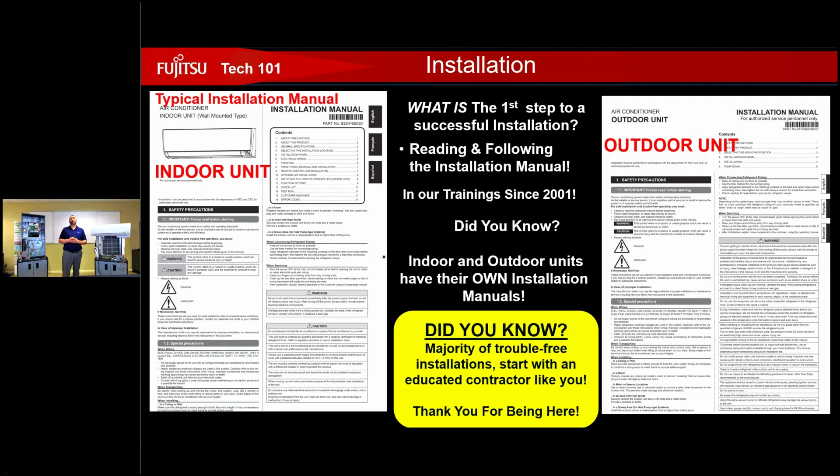So basically, you are going to have the same thing, a table of contents to start off. You can use this for a quick reference throughout the installation process if need be, but we always recommend that you read through the entire manual before doing an install. You can see there's a table of contents specific to the indoor unit and then specific to the outdoor unit. So starting with our wall-mounted units.

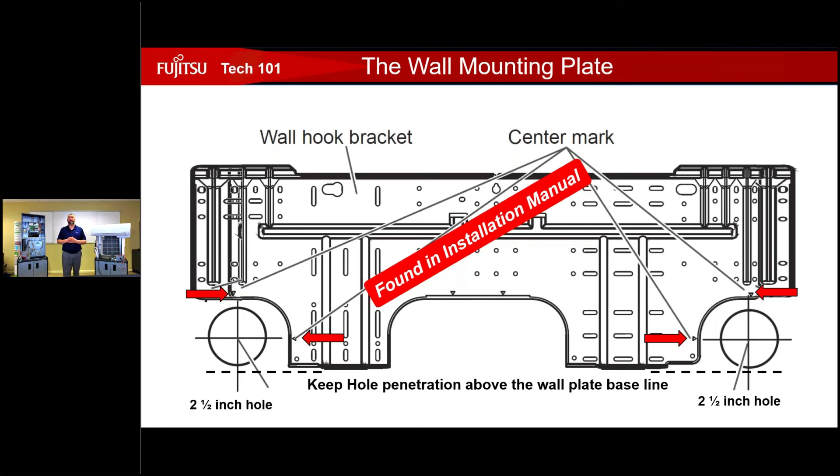2.5 inches is all we need. I have squeezed a 2 3/4, but if you try to squeeze a 3-inch bit in there, you're going to end up leaving a hole that the unit is not going to cover. So make sure that you're keeping within those parameters. Really, that 2.5 is all you're going to need.

So here you go. You have your right-hand exit. You have your 2.5-inch hole. Make the center of your hole where those two lines intersect. One of the things that I would do when I was on the job is I would put the hole on the outside wall about 1/4 inch lower than the hole on the inside of the wall, just to aid in draining. It's not something that was necessary, just something that I did personally. Made me feel a little bit better about the draining situation.

So the back of the unit, we have 6 ways that we can run this copper out. We spoke about 2 of them already, out of the rear outlets, left and right rear. We also have a bottom outlet on each side and a left and right outlet. To access those, there are little plastic punch outs on the side of the unit that we could pop off and run the copper in those directions if need be.

Getting to the outside, when we are putting the unit on the wall, this is that application we were speaking of before with the right-hand exit. When we're coming out of the unit, we want to push the copper straight out and connect the wire before we do any of this. I used to connect the wire before I actually lifted the unit up on the wall, just so that portion was done. I would also take the copper lines and the drain line and tape them together so they flow nice and easy through the hole in the wall.

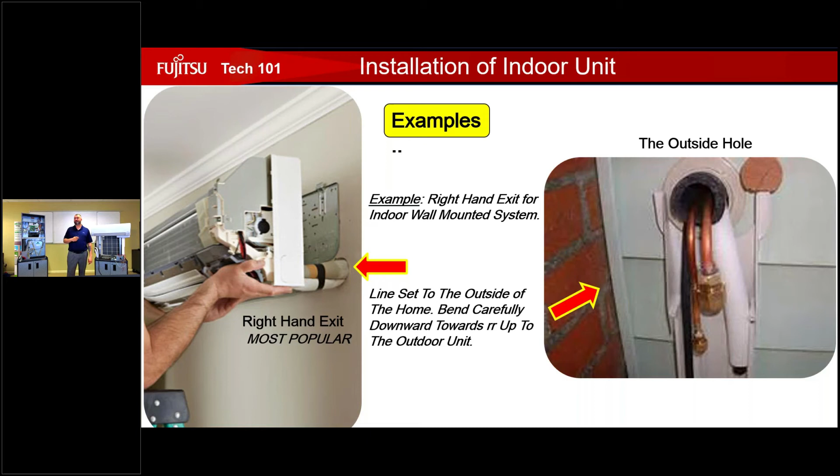All right, so you can see there's our 6-inch radius curve. Obviously, we're going to want to make sure that if we're using line hide or some sort of gutter pipe, leader pipe, we want to make sure that our curve at the outside wall is not going to go past where our covering is going to be, because that could lead to difficulties later.

One of the things I did too, this is just me. I like to run all of my line hide, put the backing of the line hide up against the wall first. This way, I'm already connected with my copper at the top, so I'm running my copper straight down. I have something to guide me in how I'm running my copper. I could just follow that line hide straight down.

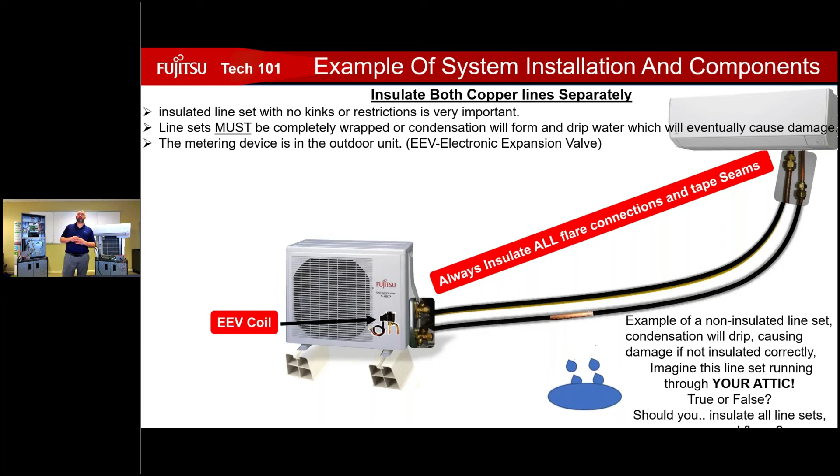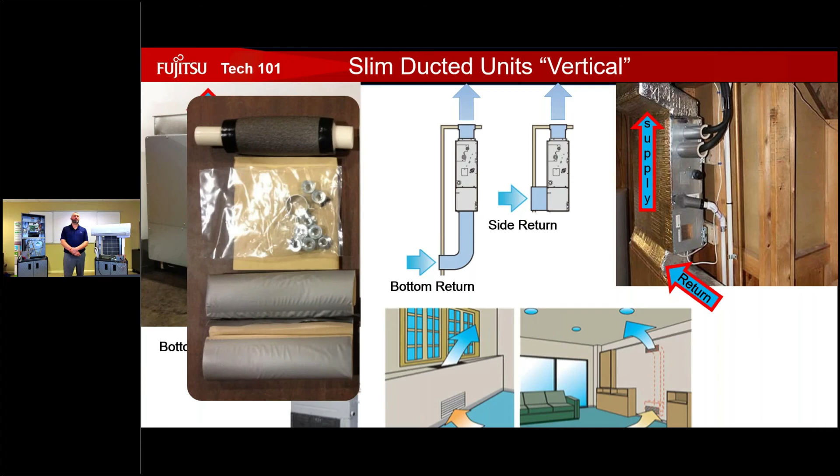Customability here, we spoke about this earlier too, with mounting on a wall. We want to remember that we have to cut that JM1 resistor out of the unit if we're hanging it like this.

Inside this unit comes a couple of different pieces that we want to make sure we don't lose or throw out. These are all necessary for the application. The drain pipe adapter is located up at the top. Then we have our nuts and washers, as well as hose clamps, and then our pipe insulators to cover the flare fittings at the indoor unit. Don't throw those accessories out, we are going to need them.

You can also have, for ducted air handlers, these louvered grills. Makes it look like there's a return box or something like that. I would always make sure that if we're not connecting ducting to that, then we would have some sort of insulation in there, so we're not mixing unconditioned air with our conditioned air.

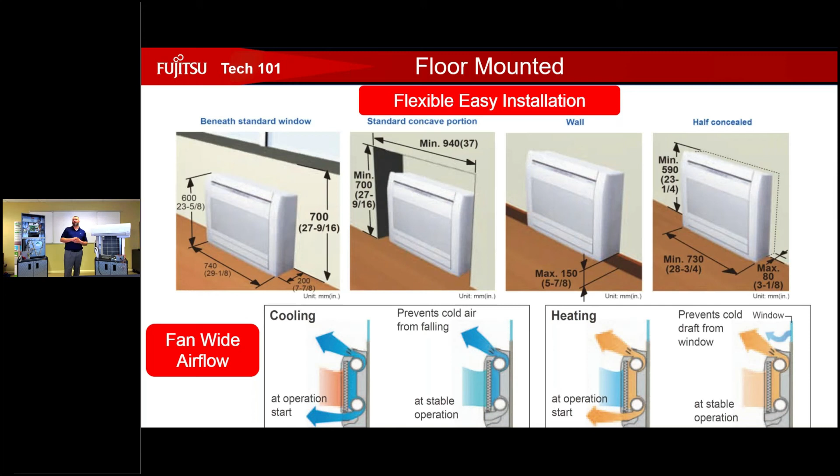All right, something like that may or may not be on your test, okay? A couple of different applications here, a couple of things I want to point out with these applications.

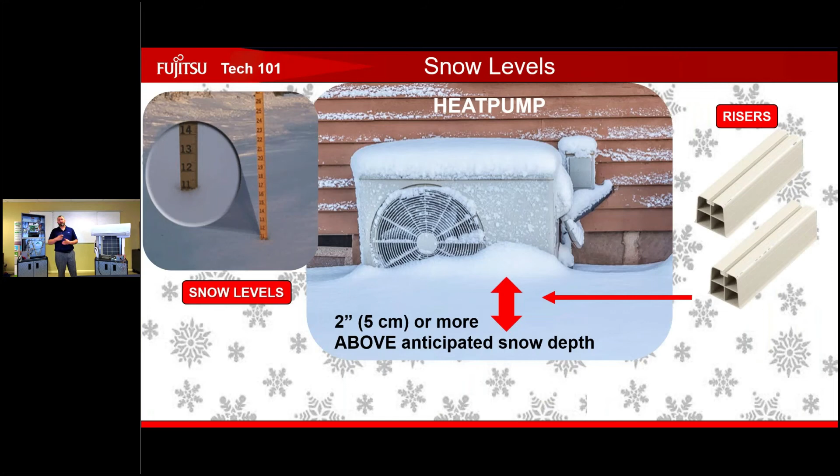So remember, above anticipated snow depth—you don't want this type of scenario to happen. All right, we got our units lifted off of the wall there. Very nice, everything looks good. We might have a little bit of an issue with airflow behind it though.

We want to try to get at least, what did they say, 6? Oh, they say 4 inches—4 inches from the back. I like to go a little bit more if I can, just to have extra airflow back there. You can see right here in this photo, this one kind of makes me feel a little bit uncomfortable. That looks really tight there, so something to keep in mind.

Those are your wall brackets. They also come with a multitude of different types of floor mounts. This one looks okay here, kind of gives us a little bit of height.

I would definitely, unless this is something that you can move at a later date, stay away from that one. Our unit's meant to be outdoors, so there's no real reason or need to cover it. Roof type installations - we spoke about the new louvers.

The new wind baffles that Fujitsu has released - this would be the perfect application for that. We want to make sure we don't have the wind blowing across that outdoor fan.

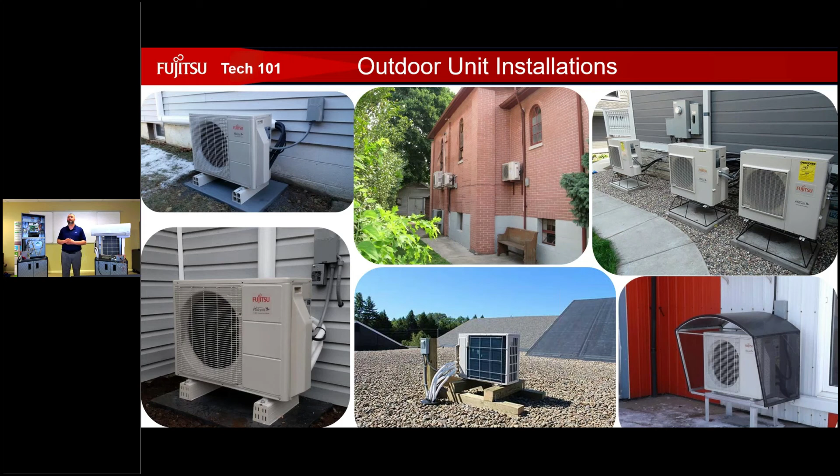And one more thing I like to point out here - when we look at the top middle, nice height, good to go there. The only issue is there's a bench right underneath it, and these units tend to condensate, so you might want to think about that. If it's a movable bench, fine. If it's an immovable bench, maybe a different location.

So there's your wind baffles again, constructed of 20 gauge steel, so they're nice and thick, very easy to install. As I said, they match the outdoor unit screw holes, so you just pop those screws off, put this unit in its place, and they also match the color of the unit directly. So matchy makes me happy.

It doesn't exactly rhyme, but whatever. I was just trying it out.

All right, so yeah, there you go. You have your wind baffle, self-tapping screws, and an installation manual that comes with them - really just a simple install. Taking a look there, pull those screws out, pop it on, put the screws back in. Good job, way to go.

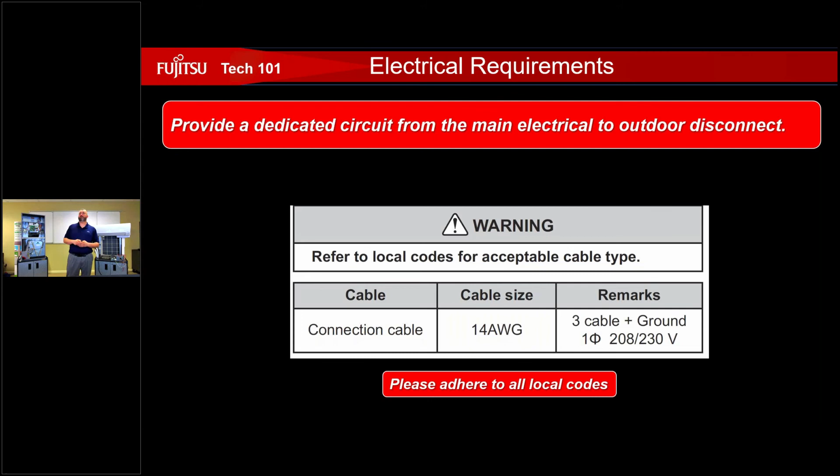Basic wiring: 14 gauge, 3-wire. That's what we have to use here. You can use unstranded wire, but it's recommended to use stranded wire because it's a little bit better of a conductor. So we recommend you go with stranded wire, 3-wire with a ground.

Before we go to connect our units, we always want to make sure that the power is off. We don't want to have any accidents happen on the job - we want to make it home to our families. So kill the power to the unit. Make sure all the wires are nice and tight - loose wires can cause issues with connectivity, arcing, and stuff along those lines.

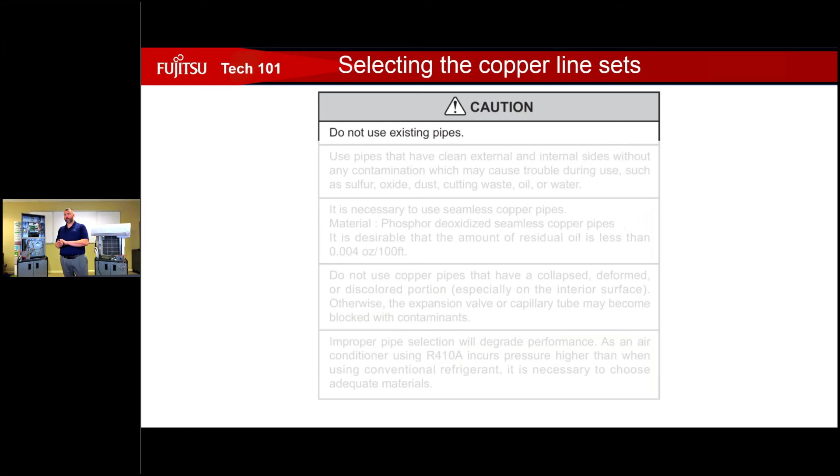Alright. Good? Yes, okay, making sure we didn't have anything else. Okay, so getting back to my copper.

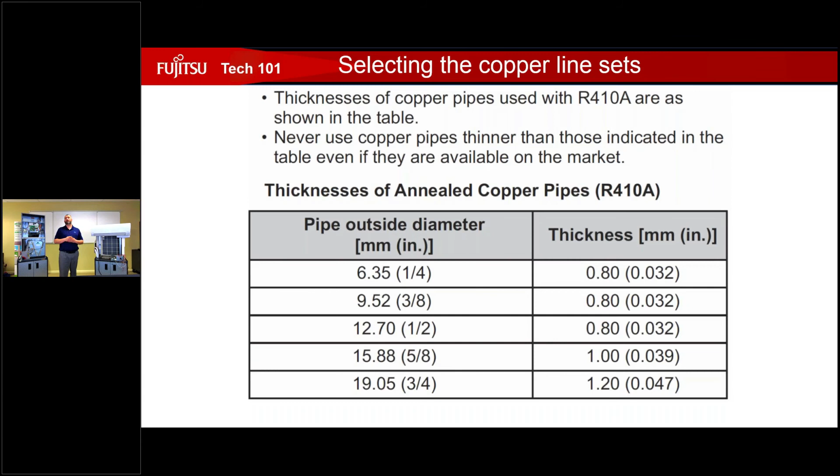Thickness of the copper is going to matter. Most domestic copper is going to be ASTM B280 rated, and it'll be written somewhere right on the jacket. That's the copper with the wall thickness that we need for our equipment. Remember that we're going to be operating at very high pressures—we'll get into that more when we talk about evacuation and leak testing. We want to make sure we have the proper thickness of our annealed copper. Annealed copper, if you don't know, is soft copper that comes in a roll. So you can see there, those are the specifics for each size copper—outside diameter for 1/4 inch, 6.35 millimeters, 1/4 inch total, and so on. So just remember, when installing our copper, we want to make sure we see that ASTM B280 rating.

Okay, flaring procedure—here's the one that gets us. This is most of the jobs—most of the problems on jobs start right here with this process, the flaring process. First things first, we always want to make sure our tubing cutter has a clean wheel. We don't want to see any dents, any chips, chew marks. I don't know if you guys get hungry with these things sometimes, but we want to make sure the wheel is nice and clean, clear of any burrs, so we can create a nice clean cut.

Then, just before we're about to make our flare, we want to make sure we don't have any burrs on the inside of the copper. So you can kind of see here, this is one of the tools that cleans the inside. If you turn it around, it'll clean the outside of the copper as well.

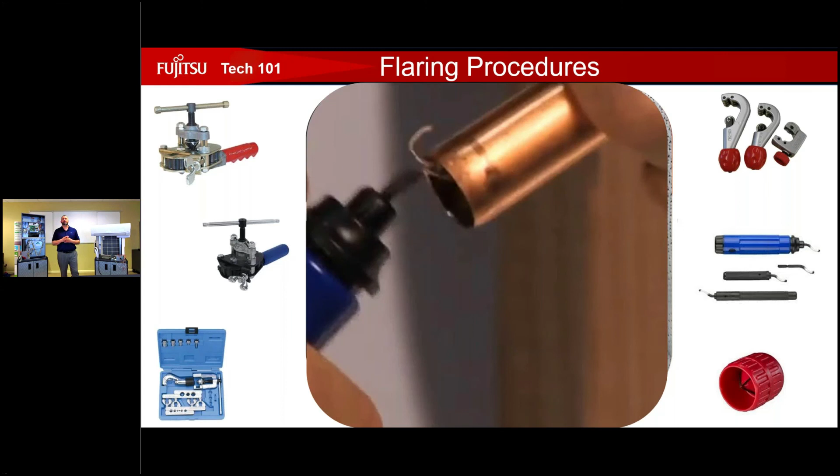And that's just to make sure that the surface doesn't have any jagged edges or anything along those lines. You actually have the deburring tool located right over here on the right-hand side. Any one of those will work. Just nice and easy, go around the inside of the copper and make sure it's completely smooth, so it doesn't get caught up in any areas before moving on to the next step.

One of the things we want to make sure when doing all of these cleaning methods is that the copper is always facing downwards. We want to make sure we don't get any debris on the inside of the pipe. Our EEV valves at our outdoor unit are very precise needle valves, about an inch and a quarter in length, and they can operate in over 500 different positions for very precise refrigerant control. So we want to make sure there's nothing that could get jammed up in there. Always face that pipe downwards and let the shavings fall out.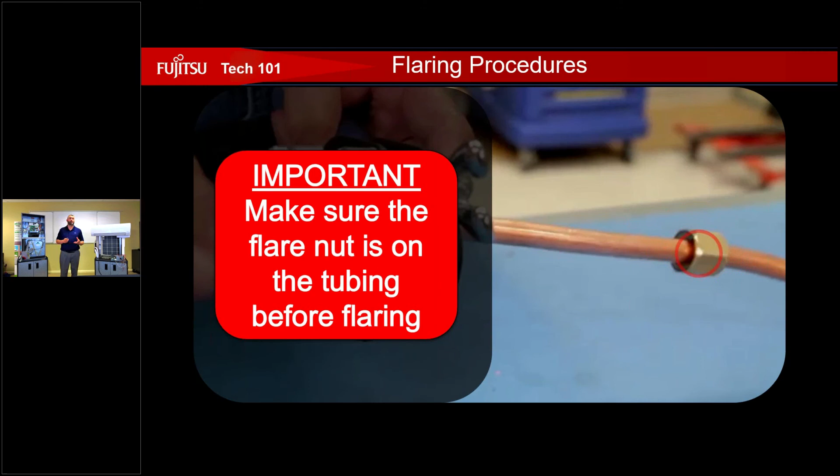So, flaring procedures - always make sure, and I know I've done this numerous times myself. We just installed a couple of these units up at one of our training locations, and what was the first thing I did? A rookie mistake. I hadn't done an install in probably about 2 or 3 years, and I made a flare without putting the flare nut on the copper first. So always make sure that flare nut is on there, otherwise you're going to have to cut that flare off and redo it. If you made it tight in the first place, that could mean having to rerun copper piping. So make sure that flare nut is on there.

Don't use any leak locks, thread sealants, chewing gum, anything along those lines. No Teflon tape. Our brass fittings are machined very precisely, and we do not need any of these products. There are some guys out there who will use 410 refrigerant oil or maybe something like Nylog on those fittings. It's not something that's necessary - they are very precise when they machine these fittings. So we're not looking to add anything to the surface of that.

Bad idea. What happens when you use these things? You could have a flare nut end up snapping on you, and that's obviously going to lead to some installation issues at that point.

When making our flare, the one thing we want to do is make sure - if we are going to be using anything - that it's whatever oil is already in the system. In most cases right now we're using 410A, so we want to make sure it's only 410A based oil that we're using to lubricate, not to seal. That's another thing a lot of guys out there think, that when you use Nylog on the system it's going to seal any kind of issue you may have with the flaring, and that's not the case. It's just a lubricant - it's going to allow the fittings to fit nice and tight with each other and flow nice and easily.

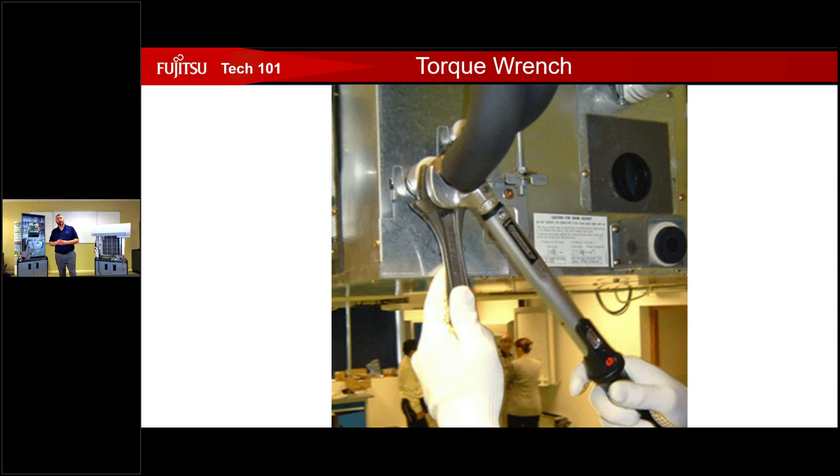You have those muscle bound guys who crank it down as hard as they can and say, 'Yeah, that's definitely not going to leak' or something along those lines. They're really just over tightening, and when you over tighten that nut, you're actually making the wall of that flare thinner. So it's very important not to over tighten and not to under tighten either.

There are specific torques that Fujitsu gives you in the installation manual, and the only way you can follow that torque chart is by using a torque wrench. So if you're installing mini splits, make sure you have this. You can see very specifically what those torque settings are, and that's located right in your installation manual. Always use a torque wrench, no excuses.

Now, when we get into the fitting process, we've already made our flare fitting. How we are going to make this fit: we take the face of the flare and put it right to the face of the flare nut, firmly holding that in place while we slowly hand tighten the flare nut. Tighten it by hand until you can't tighten it anymore, and then that's when you use your torque wrench.

If you hold the face of the flare up against the face of the nut, you don't have to worry about that fitting sliding off or not being straight, because you're controlling it. This is going to be the main part of your installation errors, right there at that fitting.

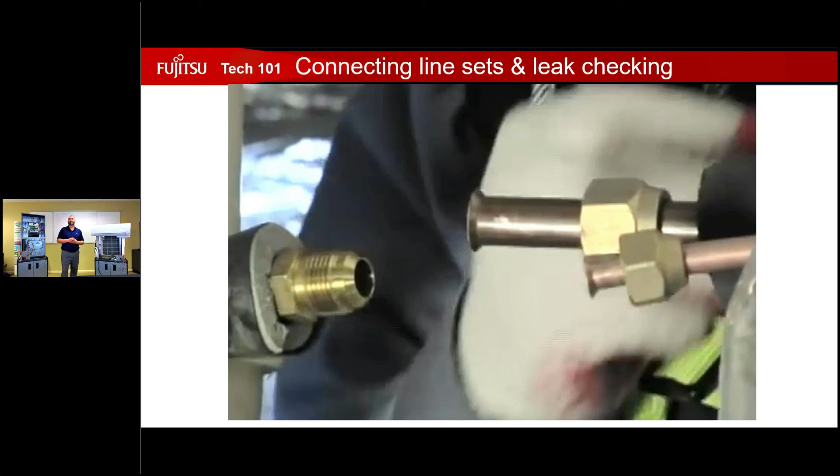You can kind of see the process as they go through it here: the nut, face of the nut onto the face of the flare, holding it in place, hand tightening that brass nut, and then torquing it down to make the final connection.

Another thing I see out in the field when guys are making these connections is they're only using one wrench. Don't do that, because you're going to end up twisting the copper on the inside of the unit and basically replacing a coil. Always use two wrenches to make sure we don't twist the copper.

Once you're done with that, I would recommend doing the leak test before this part of the process, just in case you have a leak. You don't want to have to pull off the coupler heat insulation and then have it not stick the next time you go to use it. So I would do my leak test before this, but since it's here, we're just going to talk about it.

Once you're done with your leak testing, make sure that we cover all of our brass fittings at both the indoor and outdoor units. You can see that part of the process there—nice and neat, no exposed copper. That's what we want to see. That's the final look right there.

Another one that kind of drops jaws when I mention it: when we're doing leak testing on Fujitsu mini split systems, we're using nitrogen and looking to hold a charge of between 500 to 550 PSI for 30 minutes. A lot of guys, when we ask what they're leak testing to, are looking at right around 250 to 300 PSI. That is not enough for the Fujitsu system. You have to remember we are going to be operating in heating mode, and we could see pressures upwards of 450 to 500 PSI, also depending on outdoor and indoor ambient temperatures. We want to make sure we are covered in that scenario.

So crank those valves on those nitrogen tanks all the way open and let that nitrogen flow. We want to try to get up to that 500 to 550 range and hold in that area for 30 minutes—that's really the only way. By skipping this step, you could be setting yourself up for a service call in the near future, or maybe not notice it for another year, but you're going to have to come out to this job and basically repair it for free.

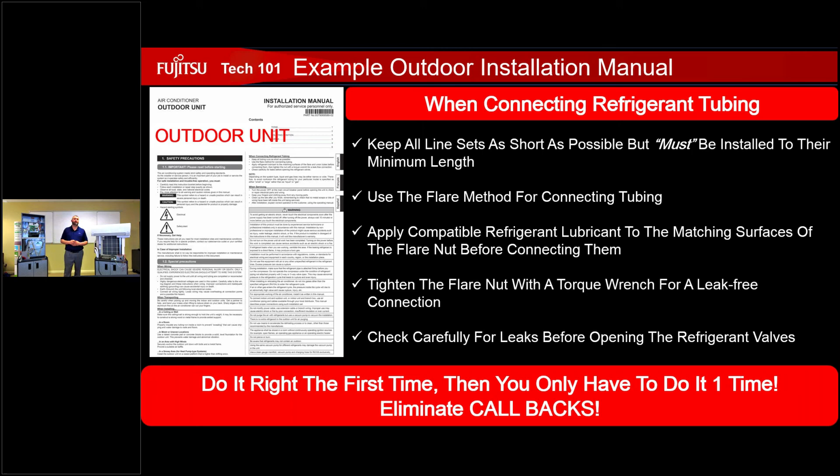All right, so refrigerant lengths, always important to remember. Single zone systems — this is what they're going to look like most of the time: 66-foot maximum, 10-foot minimum, with a 49-foot height maximum. That's going to be pretty much the standard for at least the compact, smaller sized indoor units.

Taking a look here, always follow those parameters. This is going to be for your 9, your 12, and your 15 RLS3 — once again, 66, 10, 49 maximum height differential. Make sure you follow the line set length specs per the installation manual, and make sure we're in those parameters. When we get into a multi-zone system, there are a bunch of different ones we have to follow.

Normally, I would have you guys take out your Fujitsu full line brochures and do this in person, but we don't have the ability to do that. So I'm going to go over it right here with what we're saying.

With the 36 RLX FZ and FZ1, we're looking at a total line set max of 230. That is an accumulation of all 4, or up to 4, indoor units, so we can't go past 230 for all 4. Maximum line set for each indoor unit is 82 feet, so we can't go over 82 feet on a single unit.

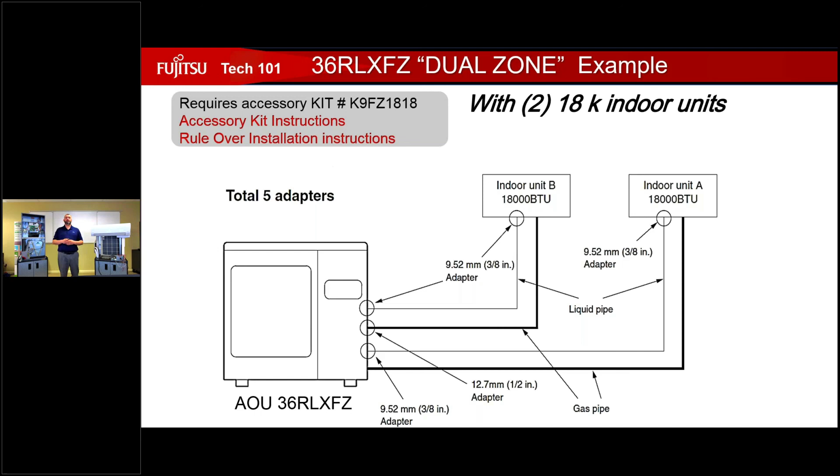When we were talking before about the two 18,000 BTU units on the AOU 36, we had to have those two brass fittings that we could use to get unit B to adapt to the copper from the indoor unit. When you get that accessory kit, or any accessory kit, with a Fujitsu system, the installation instructions for the accessory kit are going to supersede the instructions of the original installation manual.

So remember, the pipe sizes change when you're using the two 18,000 BTU units on a 36. Not only that, but our parameters as far as our line set lengths are going to change as well. So if we're using a dual 18,000 BTU setup, now our minimum line set length for each individual unit becomes 25 feet as opposed to the 16 feet that we originally called for.

Our maximum line set for each indoor unit stays the same, maximum height difference stays the same, but the total minimum length now becomes 49 feet. So you have to have at least 25 feet and at least 49 feet on the minimum, with the total max length of 131 feet.

That will be with the accessory kit instructions, so always make sure you follow those if you get an accessory kit to go with your installation. You can see the changes there - there's your nut adapters at the outdoor unit to get you to the proper size, 1/2 inch to 3/8, and from 3/8 to 1/4.

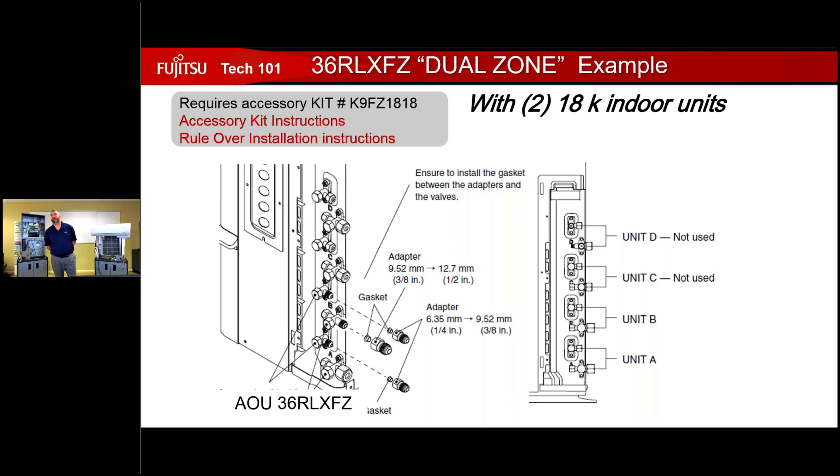In these applications here, you'll notice unit D is not used - you're just using unit A and B. No other way is this going to work. You can basically see how those go together. It comes with a little gasket there and all that fun stuff.

Remember these limitations of your refrigerant piping length - that's the same thing as we had gone over before. They just want to make me go over it twice.

Now we get to the additional refrigerant charging. This is not something that we can just wing - this is something we have to know for a fact what we have to do to add to our system. Our units vary in what and how much refrigerant that we're going to be adding, per foot.

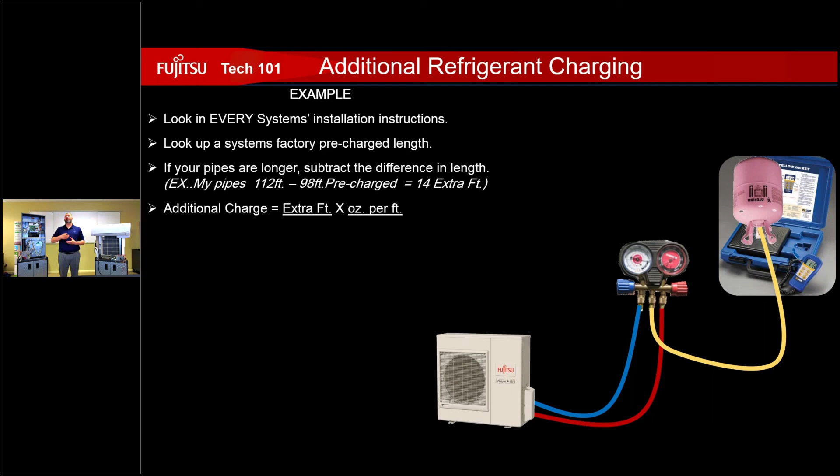But basically how it comes, we have a standard pre-charge length. In this scenario, our pre-charge length is 98 feet. We have 112 feet of copper, so we have 14 extra feet - it's just subtraction at this point. 112 is my total minus my 98 pre-charge, and I have to add refrigerant for 14 extra feet of piping. Then we weigh in our additional charge.

So where we find these calculations is going to be in the design and technical manual on the Fujitsu portal, under additional refrigeration piping at the outdoor unit. So when you go to the design and technical manual, go to the D&T, as I'm going to call it for short from now on. Go to the D&T manual, look at the outdoor unit table of contents, extra refrigerant charge, go to that page, check it out, see what it is. Usually it's around 0.20 ounces per foot or 0.21 ounces per foot.

All right, weigh that in and you'll be good to go. You'll have the perfect amount of refrigerant. The factory pre-charge will be present on the sticker of the unit. It will also be present in the Fujitsu full line brochure. So you have a couple of different places you can find that information.

And we want to make sure that we are getting the proper ounces per foot. That's going to be found in the design and technical manual. If you want to take a look here, this is going to cover most of the equipment that we use here, for the most part, the 18, 24, and 36 outdoor units. And then we have our single zone units up top. And you can see, right there, 0.2 ounces and 0.21 ounces per foot. All right, these aren't just guidelines. These are hard rules. These are hard lines in the sand.

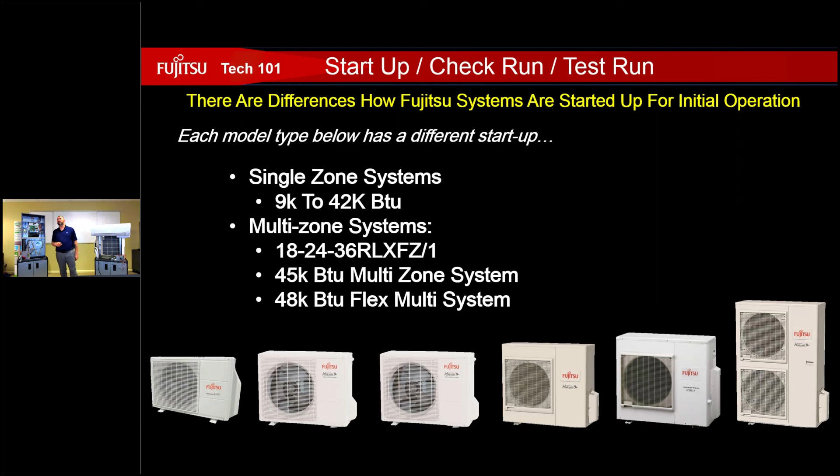All right, so getting the startup, check run, test run. There are going to be differences depending on which units you're installing. Single zone, multi-zone, 9,000 BTU all the way up to 42,000 BTU systems. Everything's going to be different. You're always going to follow the instruction manual, but when it comes to a startup checklist, that's kind of your own way of doing things.

One of the things that I would do, my startup checklist kind of started as my unit was in evacuation, or even during the leak testing process. I would start to do my cleanup, and as I'm starting to do my cleanup, I'm going through and I'm kind of inspecting things as I go along. That's a portion of my startup checklist.

So what does that include? Making sure that drains flow properly. You can pour some water into the indoor units very slowly. Have somebody wait outside to see if we're draining up, if the water's draining out of the unit. Avoid a call back for condensate dripping down a wall.

Checking all copper to make sure that there is no exposed copper, checking the flare fittings, or even at that point in time, that's where you start to cover all of your flare fittings, finishing your line hides and stuff like that. All of that can be included in your startup checklist. That's basically customizable to you.

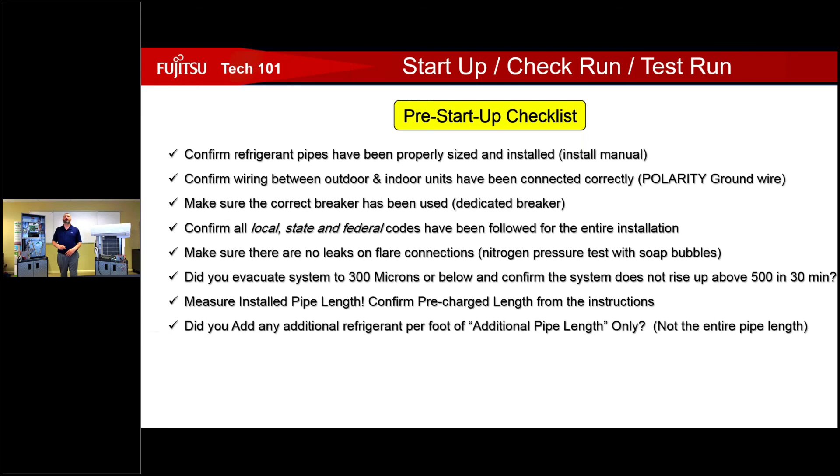Did you conform to all local, state, and federal codes? You don't want to end up having to go back because they failed an inspection or something like that. Did you evacuate to 300 microns? So on and so forth. You're just basically going to go through there and make sure everything is up to your standards, up to Fujitsu standards, up to my standards.

My standards are high. If I come out to a job and I'm there to help you, and I see something that he did wrong on the job as far as the installation manual is concerned, I'm going to tell you, hey, listen, this is what has to be done, this is what has to be fixed. I'm not going to sugarcoat it.

Check run is a self-diagnostic process that can be initiated at the outdoor unit, just as the unit is getting ready to be started up. This is on the 45 and the 48, which 48 flex unit we don't really see anymore, try not to focus on that one at all. I really don't think there's anything left in inventory as far as those are concerned. But if you do have to go back on one of them to fix a leak or something along those lines, we're going to have to do this again. So just so you're aware, eventually you could run into a 48.

Test run is used to check for operation, can be initiated from the indoor unit through a button on the remote, or you can operate a test run from the outdoor unit as well. You can check the operation in heating, check the operation in cooling, and basically it just bypasses the room thermistor and does either all heating or all cooling at max capacity, 100%. The LED and the operation and timer lights will all blink continuously with each other. It's not an error code, it's just how the system lets you know that it is in test mode.

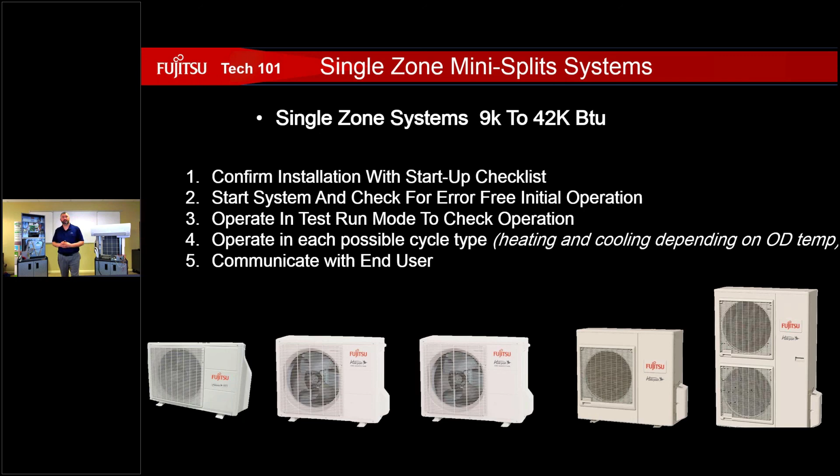All right, multi-zone systems really going to operate the same way.

Confirm the installation with your startup checklist. Start the system, operate and test run, operate in each possible mode. Remember, you're not going to be able to operate these pieces of equipment in cooling and heating at the same time. So when you're doing the test, put them all in cooling mode, then put them all in heating mode, to avoid having to reset the breaker. Make sure that everything is all good to go as far as that's concerned, and then communicate with the end user.

All right, when we get to the 45, we want to confirm installation with the startup checklist once again. It's always going to be the same. Then we're going to start our check run. The unit's going to run in check run. That is very important and highly recommended, but not mandatory. A check run cannot be stopped unless the power is taken away from the unit via the breaker. Operate then in test run mode, check the entire system operation, manually operate each indoor unit, communicate with the end user.

You see the pattern. No matter what it is, we always want to confirm our startup checklist, make sure that we have done it to our standards, to Fujitsu standards, start our check run or test run or both, operate in each mode to make sure that everything is operating properly, then manually operate on each indoor unit, then communicate with the end user. If you follow all of these guidelines here, you're never going to get that nuisance callback. You're only going to get a callback if something actually did go wrong with the system.

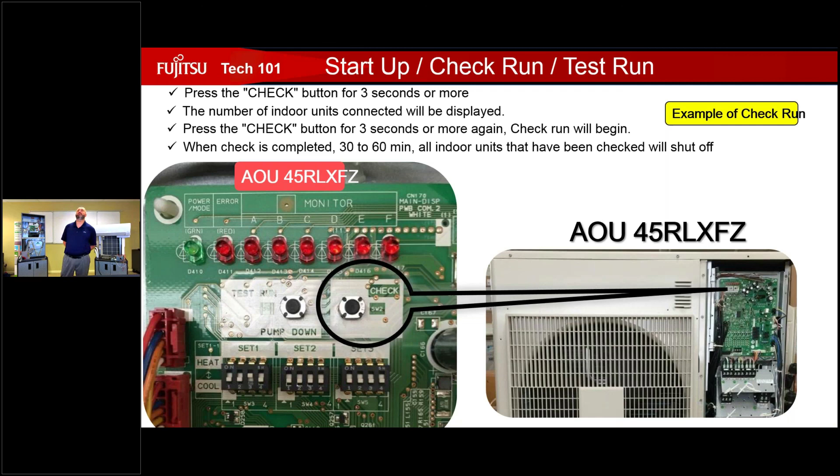All right, so you can see here on the 45 where the check run button is located. Also available on that system is a pump down button, so you'll be able to pump all the refrigerant out of the system back into the condenser just by holding down that button. So you have that check run there. Complete details are going to be found in your design and technical manual.

All right, so when a check run starts, we are going to have all of our indoor units connected to the outdoor unit. They will start to run automatically. There's nothing you can do to stop it from the remotes. You cannot check the operation of the indoor unit separately, it won't allow you to do so. Check run can be used with the temperature when the temperature is within Fujitsu parameter, so obviously it's not going to operate these systems in cooling under 14 degrees and in heating over 75 degrees. The check run can be completed in about 30 minutes for cooling and about an hour for heating. Once again, not mandatory, but recommended to do so.

Any questions? You're good. All right.